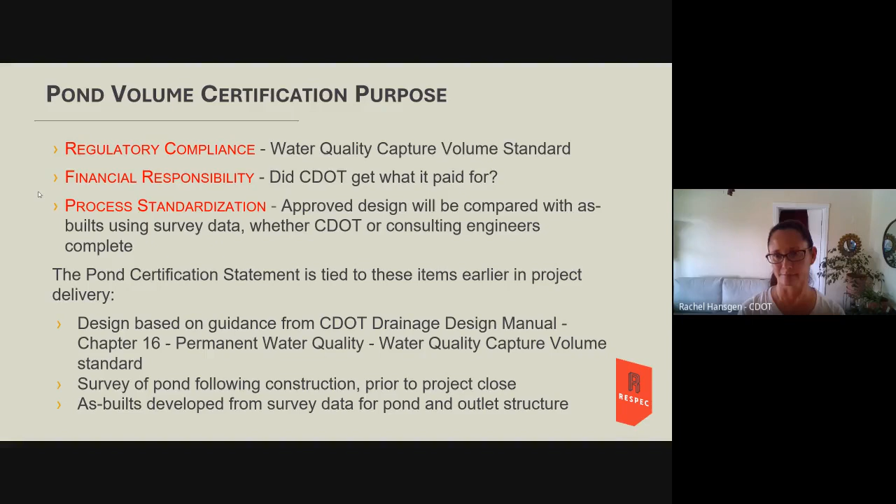Are there any questions about the 30,000 foot level of the pond certification statement? Okay, Jesse, all right.

So as promised, what data is required before you start digging in? Frankly, if you get all this data straight off, you can be done with this in 45 minutes pretty easily. But as I've found in doing these so far, you don't always get what you need. The first thing you need is the construction plans, and the water quality report.

The construction plans may or may not contain all the information you need. Sometimes the construction plans show WQCV equals, defining the water quality capture volume. The contractor doesn't need to know what that is, but sometimes the plans say that, so that makes your job easier.

If the construction plans don't have that, then you'd look to the water quality report, which may be a subset of the drainage report or maybe a standalone document. What you really need is, what is the water quality capture volume? That'll be an acre footage typically. And then at what elevation is that supposed to occur? That'll be an elevation.

The water quality report will typically contain UD detention spreadsheets. There are other ways to go about calculating at what elevation the water quality capture volume occurs, but UD detention.xls has made it simple for everybody, so a lot of people use that.

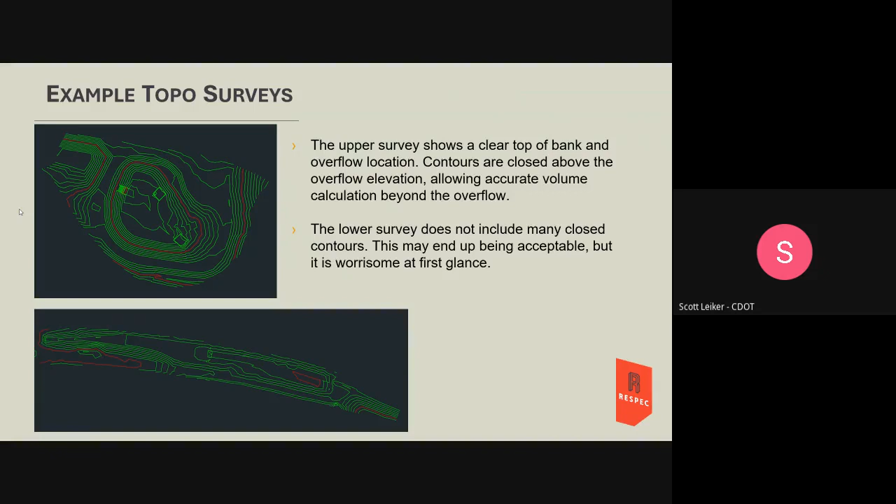Jesse, Scott has a question before you move on. Yeah, go ahead, Scott. Like the previous screen and this screen, typically we get that information from the project manager or the water quality specialist, who is forwarding this information to either the consultant or the engineer. Who are we dealing with? Who are we working with? It should be the project manager. Yes, Scott, that's who I've been getting it from so far. Right, I think, yep. Anything else before I move on?

Great. So that was what you needed for the geometric analysis of the grading, right? The pond volume. This is what is needed to make sure water can leave the pond the way it was intended to leave the pond.

An as-built markup of the outlet structure. The outlet structure as built should be a separate viewport in CAD, or it could be a redlined construction plan in PDF. And the data that you get has to answer, how does water leave the pond?

So that might be orifices in the orifice plate. How big are they and at what elevation? The overflow weir into the outlet structure - that might be a type C inlet with a top of grate elevation. It might be some other type of structure. And then there may be an overflow weir, like a 100-year overflow weir.

The important thing is, if there are no PDF markups, if you don't get a markup of the orifice plate that shows different elevations from those in the design drawings, in the construction plans, they weren't surveyed. Because I could survey the invert of an orifice 5 times and I would get 5 different values to the 0.01. So it's a near statistical impossibility that if they say, oh, this is as-built, they didn't survey it.

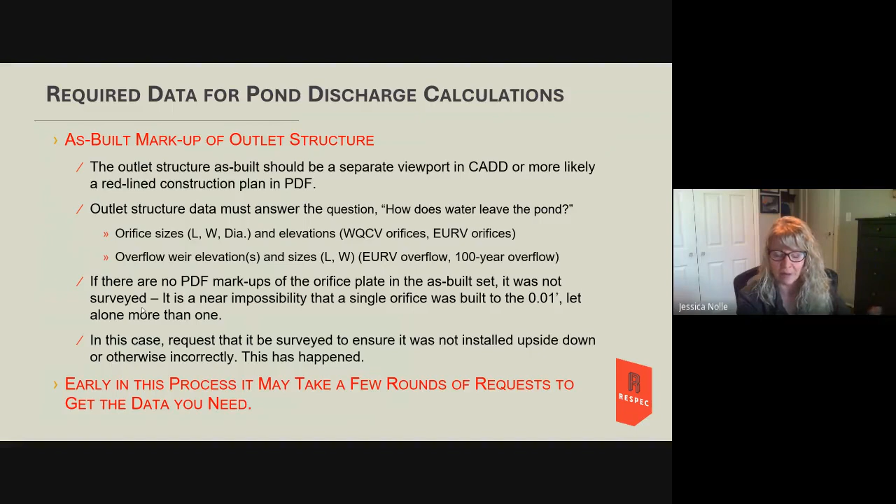And as CDOT moves through this process, and they have their contractors and consultants participate in this process, it may take a few rounds of requests to get the data that you want. But I'm hopeful that after enough times of asking for it, the surveyor will get what you need.

This is an example of an outlet structure survey that I got after I said - actually, this outlet structure, the first time I got the survey, I didn't get these orifices or the inverts. I got the bolt holes. So the surveyor went out and did a really detailed job of surveying bolt holes. And I had to send him back out to get the actual holes that the water could go through. So this is the level of detail that we're looking for.

Does anybody have any questions? And then this top of concrete, 5560, that then was the water quality capture volume overflow. Does anybody have any questions on this so far?

Hey Jesse, I was just going to say, so the as-built survey is typically a plan sheet that has been marked up with red lines. Right? And if that sheet comes back and there's nothing marked up, yes, they probably didn't do an as-built survey. So this next slide is an example of what I received on another project, and it says as-built in the upper right-hand corner, but there's nothing marked up. So this was a pretty good indication that it wasn't surveyed.

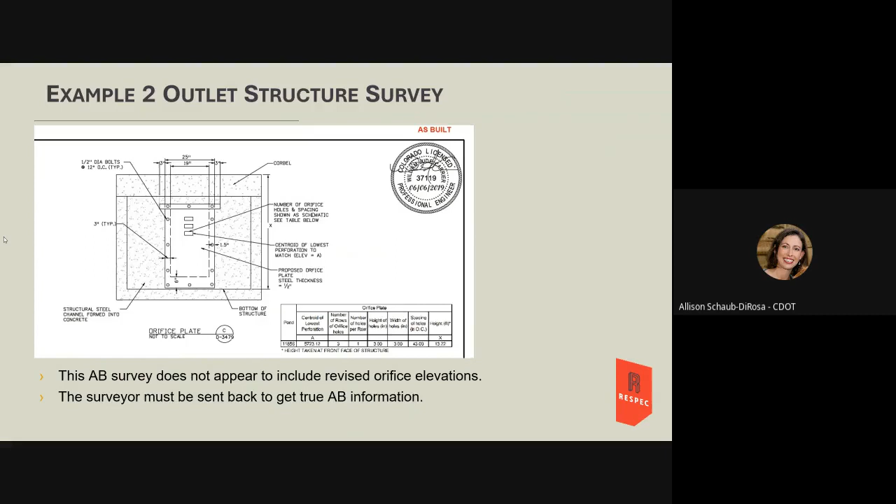Jesse, I had a question on the last example on the last slide - this one? Yeah. So is there just one elevation given there, the centroid of the lowest perforation, and that's it? And then so then just assuming the spacing? So it has the spacing here.

So it says the A is the centroid of the lowest perforation, which would be the centroid of the lowest perforation, match elevation A, and the number of rows 3. Now this is a great example of what I just love, is when people don't bother to draw things to scale.

Clearly the spacing of the holes is not... well, maybe it is if this whole thing is 13 feet high, but then it's not drawn to scale horizontally. Well, it says not to scale, but like, oh come on. Yeah, when that's so badly to scale.

I know, right? But you go with the numbers, and when you get this, you should be able to go see in the drainage report that this was the design. But then when you get the as-built survey, you would add 42 inches to this, and then you would add another 42 inches to that, and that would give you where these are supposed to be.

Yeah, okay, so thinking like a contractor - what is this actually supposed to be, and forgetting that it's horribly out of proportion. That's what I wanted to say. It's fine if a drawing's not to scale, but I feel like it should be proportional. But there's no rule for that, so you just have to go with the numbers that are there.

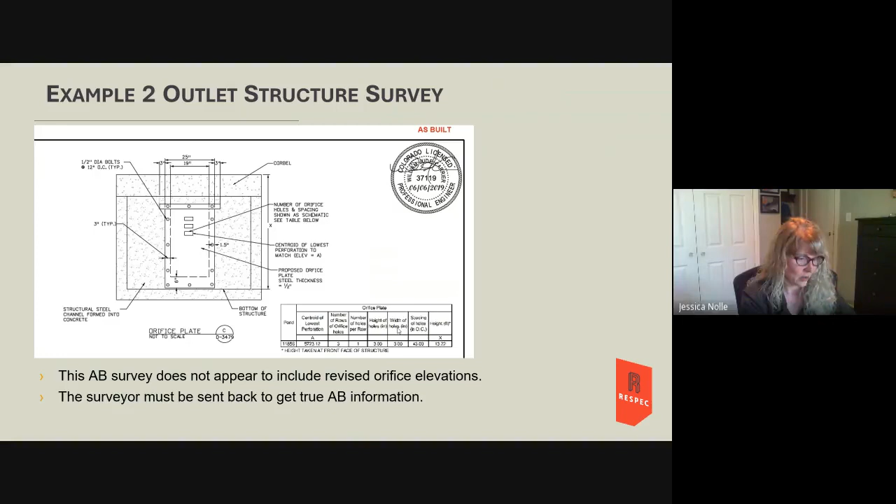Okay, so we will talk more about going through the examples, going through what was received. But I'm going to move on now to the general pond volume calculation, and some different options for that.

In your CDOT drainage design manual, section 12.7.2 indicates 3 ways to calculate volume. Average end area is something everybody knows. You would take the average of the elevation, or the average of the area enclosed by contour 1 and the area enclosed by contour 2, and you would average over the difference in elevation between those.

This is not the most common way to do it, but it's allowed by your drainage design manual. The frustrum of a pyramid equation is the one that is more commonly used, and again, you can look these up in your drainage design manual.

The final way that 12.7.2 says you can calculate is the prismoidal formula, but it's for perfectly trapezoidal basins, so we're not really going to get into that.

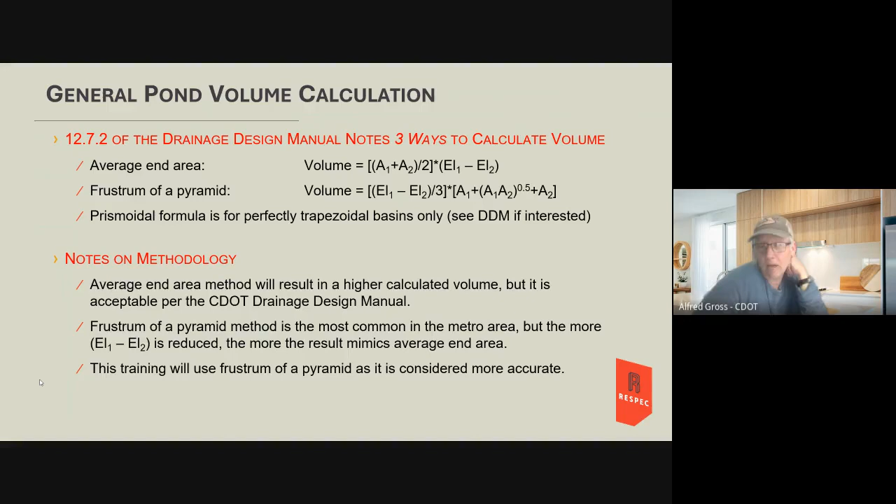Hey Jesse, real quick - so when you're doing that with those different elevations, those correspond to your contours, right? Those correspond to the contours, yeah. And then the contours are only 1 foot. I don't see... I know the example you're talking about where they went to 1/100 of a foot.

The way contours are developed is that surveyors go out there, put their survey rod down, take a measurement, walk, take another one, and walk again. The tighter the grid the surveyor uses, the more accurate model you get. If they take a shot every 5 feet, you'll get a more accurate model than if they take a shot every 20 feet, and you won't know the difference.

I'm guessing your survey manual has frequencies for this. Frankly, if you have a fairly uniform side slope, you're not going to get a whole lot more accurate taking a shot every 5 feet than every 10 or 15. Surveyors are trained to take a shot where the grade changes, or on a grid. The accuracy of the contours that come out of that survey depends on how tight the grid was.

But I feel like for us to question that, you get a survey from a PLS, you've got to just go with what's given. That's why we ask them to produce the contours. They're saying that this is a fair representation, so we're just going to go with that.

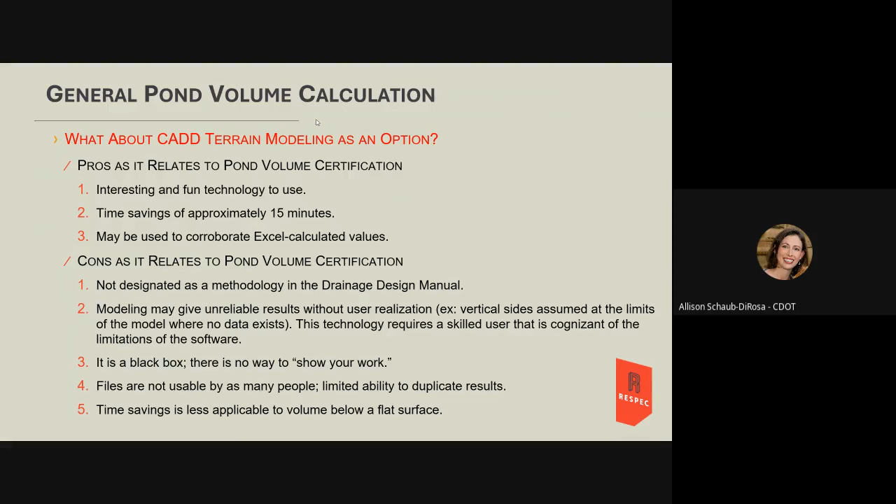The water is like the surface—when we say pond volume, we mean the water quality capture volume occurs when water builds up to a certain elevation, and the water is going to be flat at that elevation. So what is the volume below elevation 5562.46? That's easier to do by hand using existing contours than it would be if you had an irregular surface and you're digging.

I gotcha, yeah, I gotcha. That's a much easier calculation to do by hand. I may have missed a little bit of what you're saying, but I think this goes back to the general applicability of using that—what did they do for the design, and if we're going to be using something different.

The differences aren't substantial, Stuart. The differences are pretty minimal, actually. Because I've done these backwards, forwards, and sideways, different ways, my volumes change by 1 or 2%. So it's not that what you're saying is bad—it's a black box, there's no way to show your work. But that's the bottom line of it.

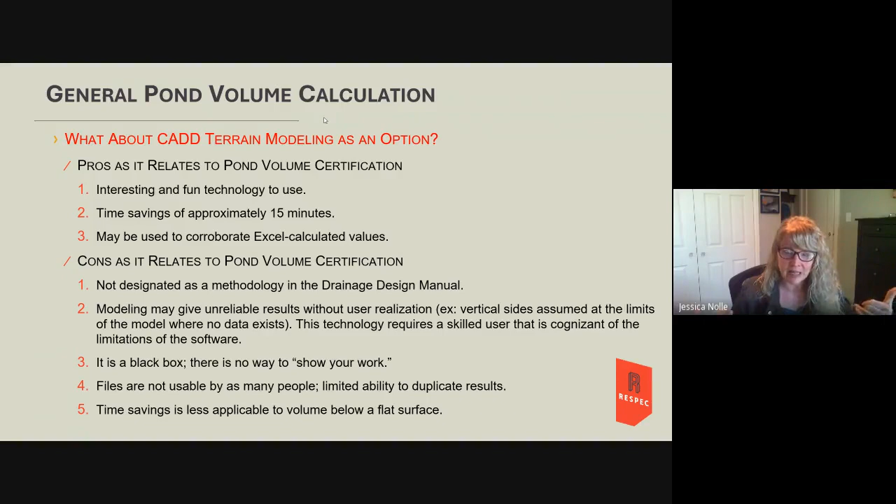Okay, yep, I stand by it. No, I just think it's more defensible—like you can say, look, here is all the data, and anybody can follow it. Sure, yeah, no, I get it, but we're talking about coming in after the fact, comparing—just back to comparing apples to apples is my point. Yeah, okay.

So what we're ultimately looking for, with a few caveats and exceptions I'll get into later, is the calculated pond volume at the design water quality capture volume elevation must match the construction plans and the design report within reason—substantial conformance, or substantial compliance. So we can have reasonable percentages, right? Is it within 5%, 8%? That's something we could all look at, and I'll get to what will help us determine that later on this slide.

For one of the ponds I looked at for CDOT, somebody said, hey look, we're allowed—and here it is in quotes—we're allowed variation from the plan elevations of 1 inch. So I actually went in, and for all the contours that were surveyed, I dropped their elevation by 1 inch in an effort to say, did we get what we paid for? And it helped like this much.

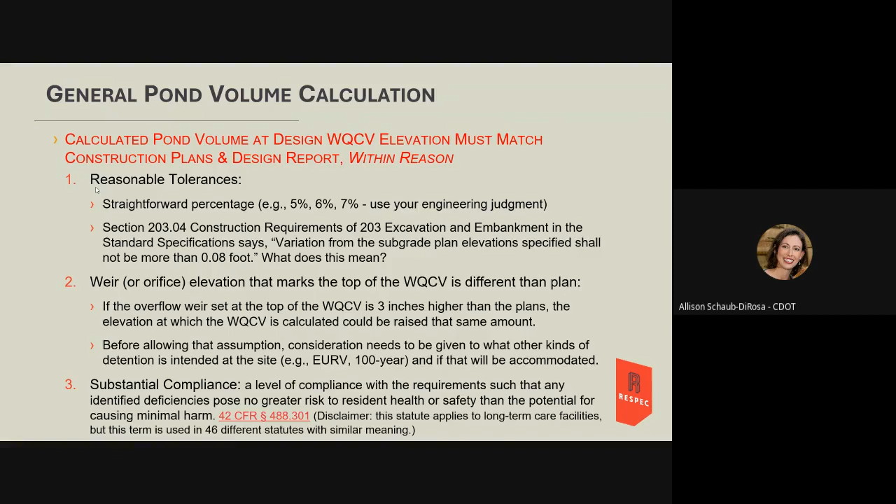There will be questions, and you can try me first. But I think the big question here that Jesse's pointing out is there will be a tolerance here. It won't be exact, right?

It all potentially seems very difficult, but if you have all the information you need, it's really straightforward, especially if they did a good job. I've spent a significant amount of time trying to get to yes, checking things like where the outlets were. Probably 75% of the ponds I've looked at met requirements right off the bat. I think only 2 out of 8 didn't meet the volume requirement right off the bat.

I think as CDOT proceeds through this, it'll become apparent to the contractor: if you're going to miss, you need to miss high. Don't be short on this.

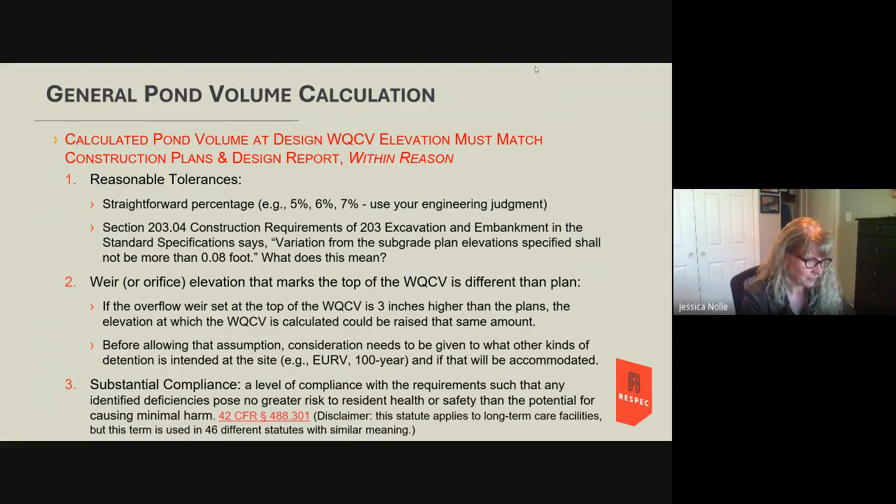Here was another consideration, and this goes back to what if you're not getting everything you need. Sometimes the design documents may have to be reviewed to understand the intent of the construction plans. Sometimes the water quality capture volume or its associated elevation may not be in the plans. I said that at the beginning. What if the reviewer notes that the design documents, the UD detention or water quality report, do not match the construction plans?

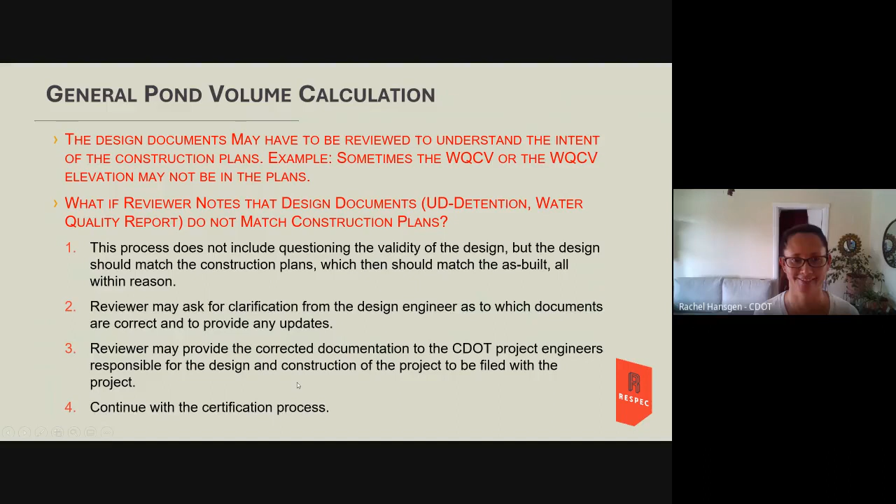Rachel? Hey Rachel, you're on mute, go ahead. Can I stop this and start it? I don't know, I've never done that before. I think it'll make 2 different recordings, but you can try it, and we can stitch them together if needed. I'll hold on to it. It's only probably 6 or 7 minutes. I'll let it run. Okay sounds good, we'll have a nice little pause there.

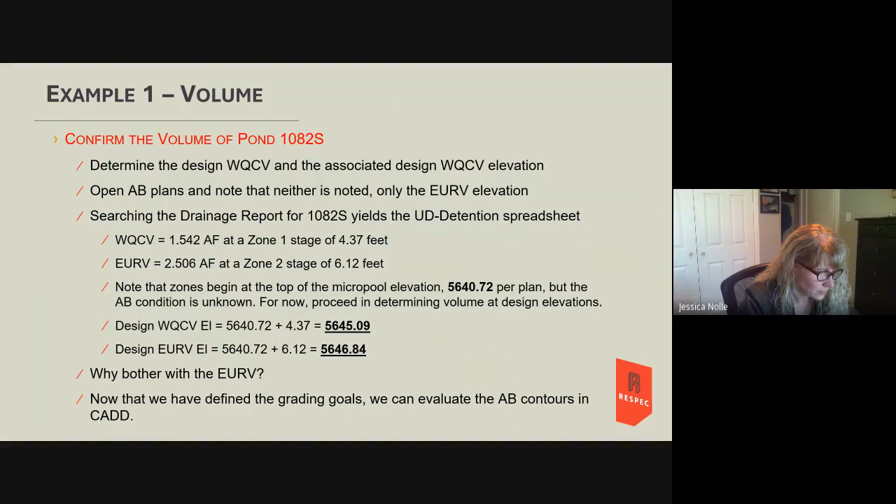Amy, are you ready with 1082 South? Yes, I am. Okay, I'm going to run to powder my nose.

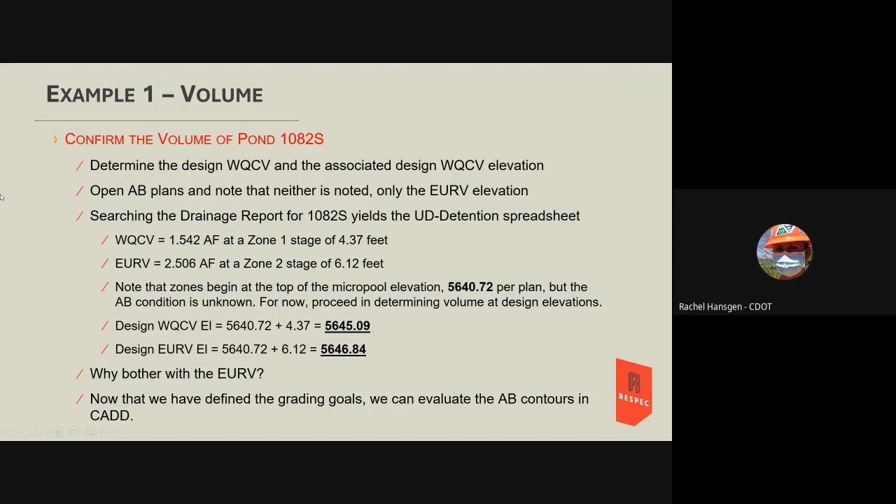All right, I'm here. So we're going to look at one of the ponds that I reviewed for CDOT. As I stated at the beginning, the first thing you need to know to figure out if it was built to plan is figuring out what the plan is.

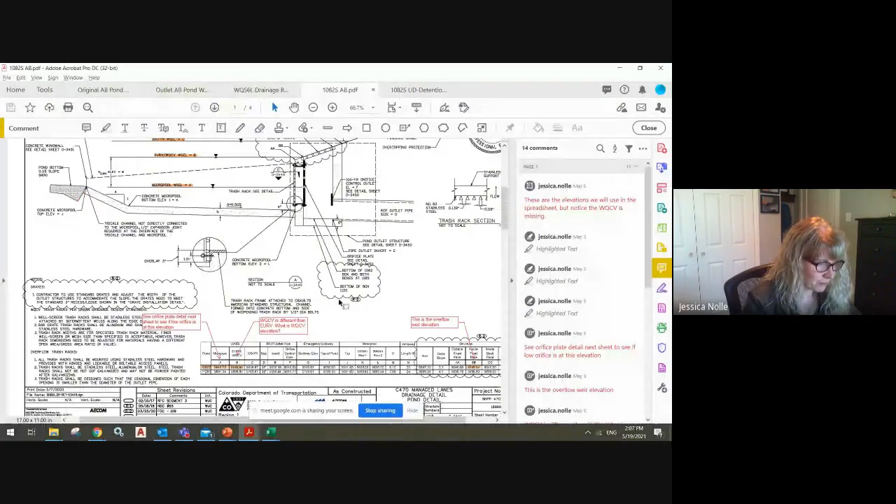So this is the as-built plan I received. Because there's more than one pond involved, you can see they've got it in a table, which is typically a nice way to do it. And we zoom in here. Hope nobody gets seasick easily.

We zoom in and see elevation B is the EURV / water quality capture volume. Well, this says HEURV. As I said before, EURV is not always included, and the water quality capture volume is typically less than that.

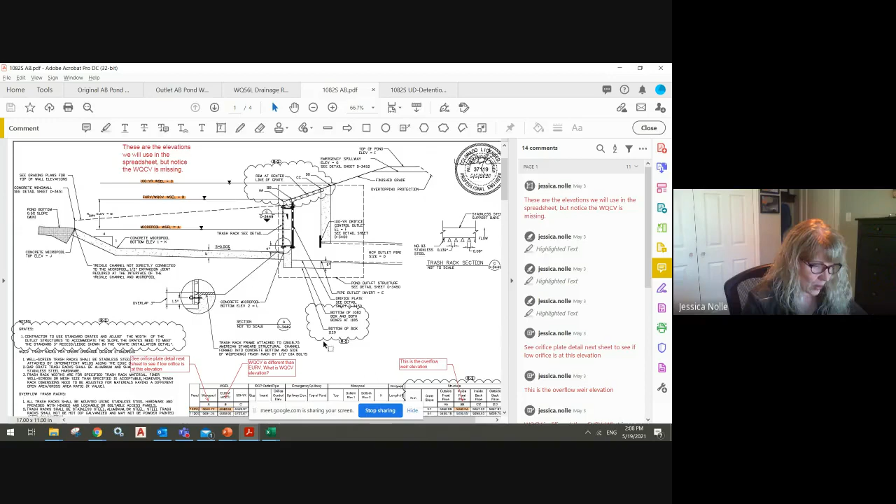So looking at this table, there's the overflow, showing that at this elevation it's going to start spilling over into the outlet structure. So the water quality capture volume is not actually in here, and the water quality capture volume elevation is not in here either.

We can look at the orifice plate detail on the next sheet to see if the low orifice is at this design elevation, just to confirm it. 40.72 is the top of the micro pool, and that's typically where you put your first orifice.

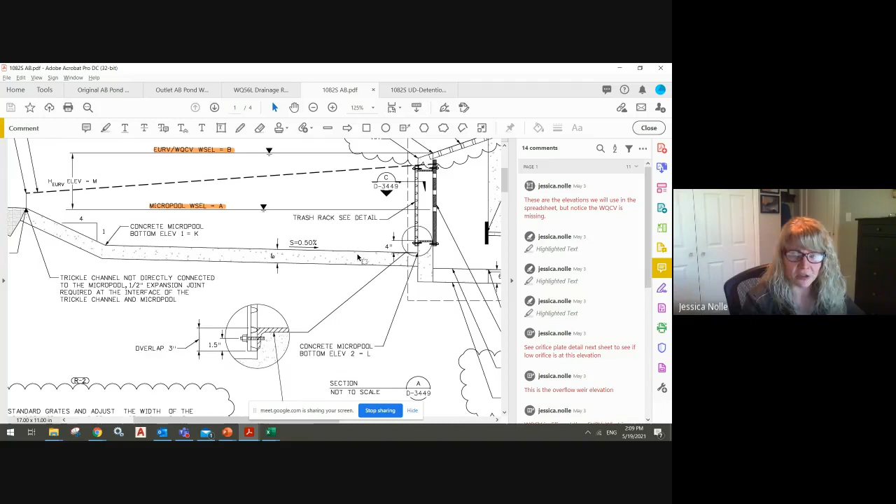As a sidebar, going through the Mile High Flood District's Volume 3 on how to design an outlet structure will be really informative if that hasn't been part of your practice as an engineer, letting you know what's typically done and how to review plans. Everyone does different things in their careers, but Volume 3 is really good. They have a whole section on outlet structures and water quality capture volume, extended detention basins. That's a good thing to review.

All right, so now we're going to go to the drainage report to see if it's in there. This is what I was referring to before, sometimes not all the information you need is on the plans. So this is 5 pages of the drainage report I excerpted for this presentation. There were probably 150 pages I had to dig through to find it, but the good news is it's searchable in PDF, so you can type in the word detention basin and get to this.

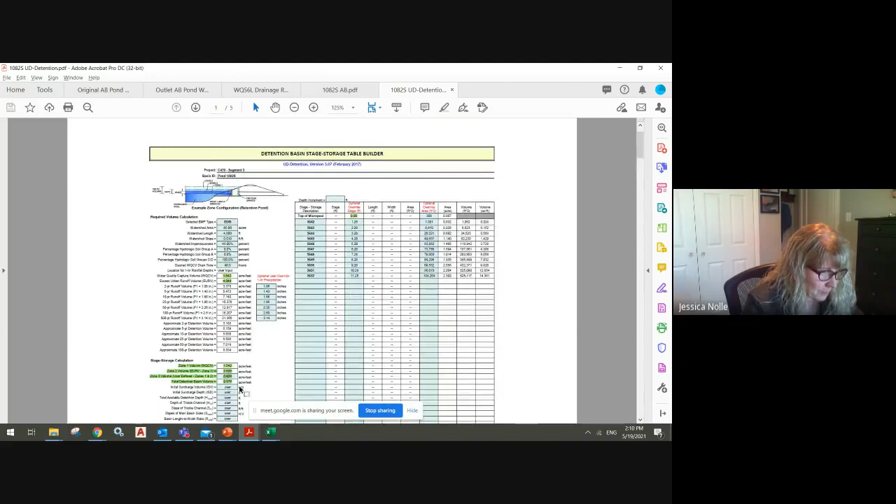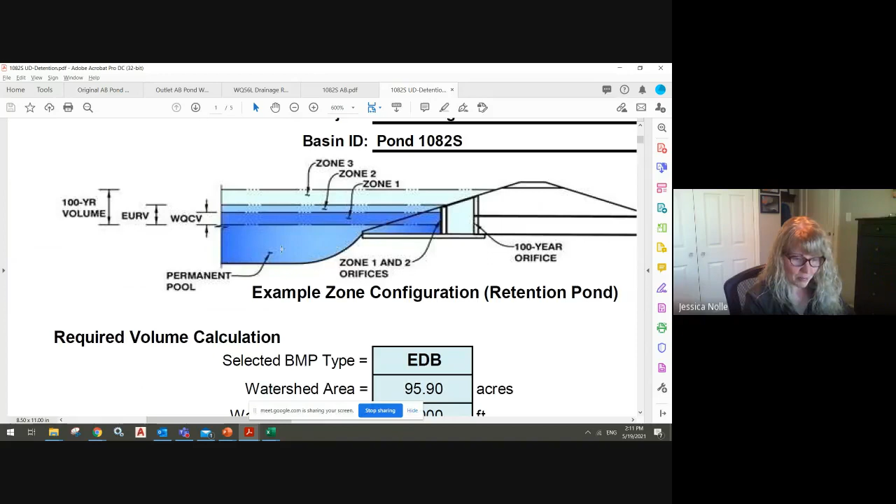So here are some values that we have. It says the water quality capture volume is 1.542 acre feet, and the EURV is 4.048 acre feet. Zone 1, if we go up to this schematic, you can see water quality capture volume. This is almost exactly what the outlet structure looks like, right? Here's the EURV, it's where the overtopping occurs. The water quality capture volume is zone 1. Here's your permanent pool, your micro pool that we talked about.

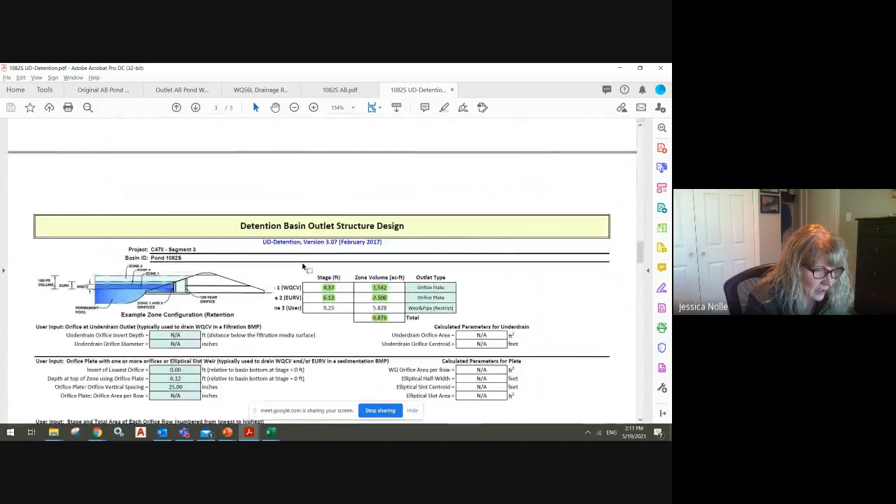So looking at this, zone 1 is 1.542, that matches here. The elevation at which zone 1 occurs is... this says, I don't know why this is hidden, but it says zone 1, water quality capture volume. Here's that 1.542 acre feet again, and a stage of 4.37. So that is above the lowest orifice centroid elevation.

So we have the 1.542 acre feet at a zone 1 stage of 4.37. The EURV, I won't show, it's in there if you guys want to go through this. That's 2.506, at a stage of 6.12.

So again, the zones begin at the top of the micro pool. That's the permanent pool elevation of 40.72 that was in the plans. The as-built condition is unknown, but what was the design? The design water quality capture volume is at the centroid of the lowest orifice, or the top of the micropool, this is the permanent pool, 40.72 plus the zone 1 stage of 4.37. So we end up with a design water quality capture volume elevation of 45.09 and a design EURV elevation of

46.84. Why bother with the EURV? I think I mentioned that a little bit before, that maybe if your water quality capture volume is a little short, maybe they make up for it before the water starts spilling out. That might be why you would want to consider the EURV.

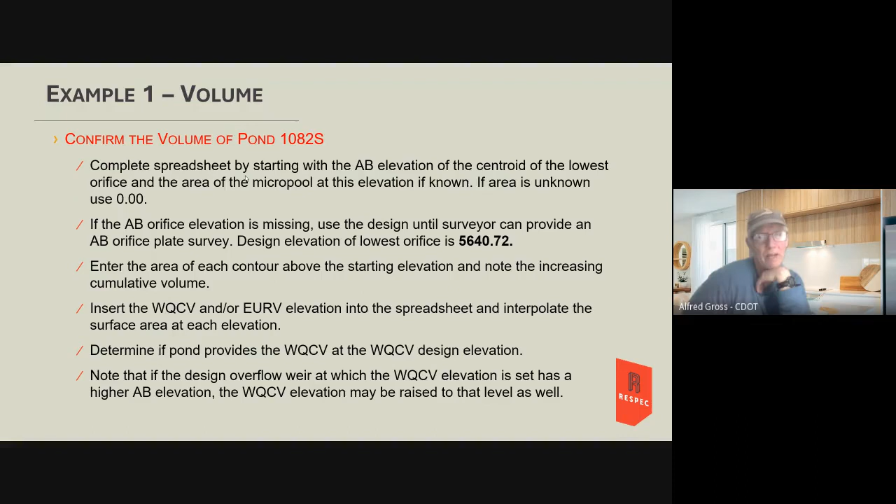Yeah, 1082 is along 470. That's what I thought. So the reason it wasn't on here is because your other ponds along C470 that don't have EURV do have the water quality capture volume. Oh okay, so this sheet just, the table was not set up for, all they had to do was add another column. Right, and say EURV not applicable on the other ponds. Yep, but whatever, I mean that's fine, it was nice. It all matched up.

All right, so now we have our goals, right? We have a water quality capture elevation of 45.09 and a volume of 1.542.

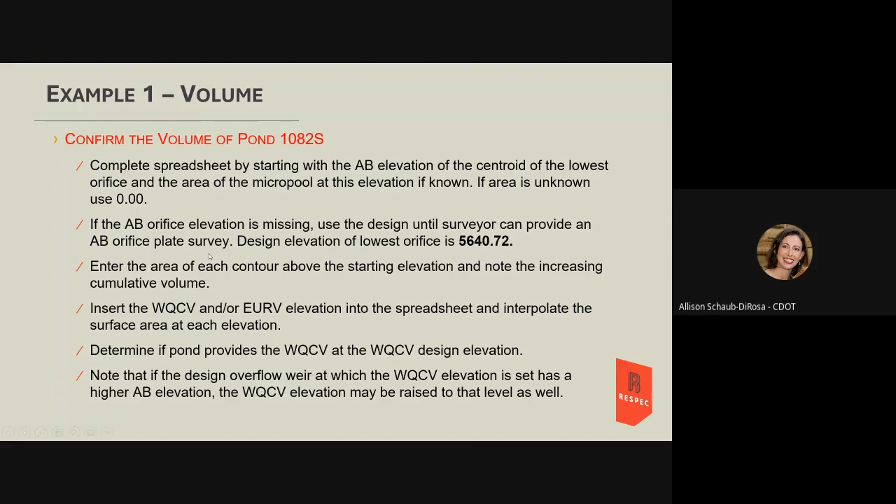So I have a question: what if it doesn't match up? I know we're not checking the design, but what do we do? Well, that's when I mentioned earlier that maybe they didn't put the most updated UD detention spreadsheet in, or they didn't update the text of their report. What if they just screw it up? Well, that's when you call the person who sent you these files and say, hey, these don't match. That should be the project manager for the design portion of the project. Then they will get back with the consultant that did the design and say, why don't the design plans match your drainage report?

And then you just go from there. But to hold them accountable for it, it's fine—if it doesn't match, it doesn't match. Now if it's off by like 200ths, forget about it. But typically that's the point where I'd say, why doesn't this match? I actually had one where the naming of the pond was confusing—I was like, which pond am I looking at? And they said, oh we're so sorry, that was from a previous submittal. Here's the right spreadsheet, here's the right PDF. And we went from there.

So if it doesn't match, most of the time it's going to match. If it doesn't match, that's when you raise your hand and say this doesn't match—give me the right information, give me information that matches.

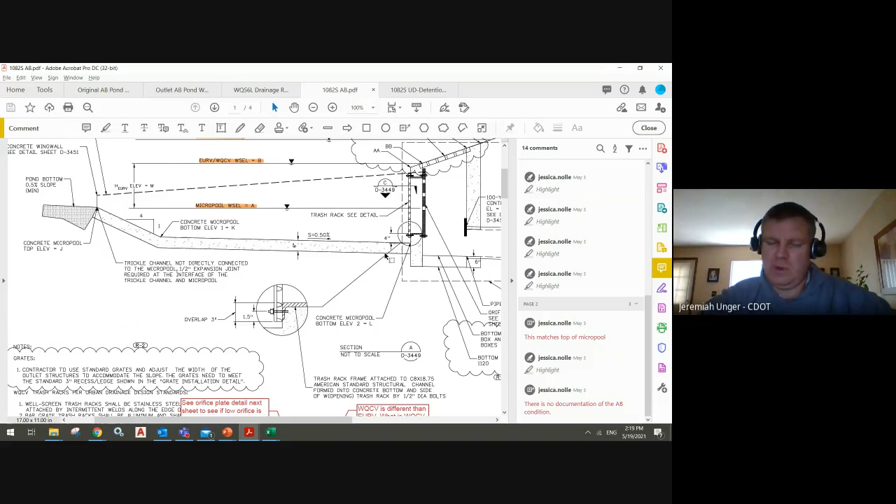I think that wherever the centroid of the lowest orifice is, that's where you need to start because that's how water gets out. So looking at this plan in front of us, Jesse, is it safe to assume that the initial surcharge volume wasn't built into the volume of the micropool?

Let's see, maybe elevation J is above elevation A. Oh, look at that, Jeremiah. Elevation J is what, 9 inches above elevation A? So it doesn't show it, but this is again a lovely example of drawing one drawing and then using different variables. It looks like this elevation is much higher than this.

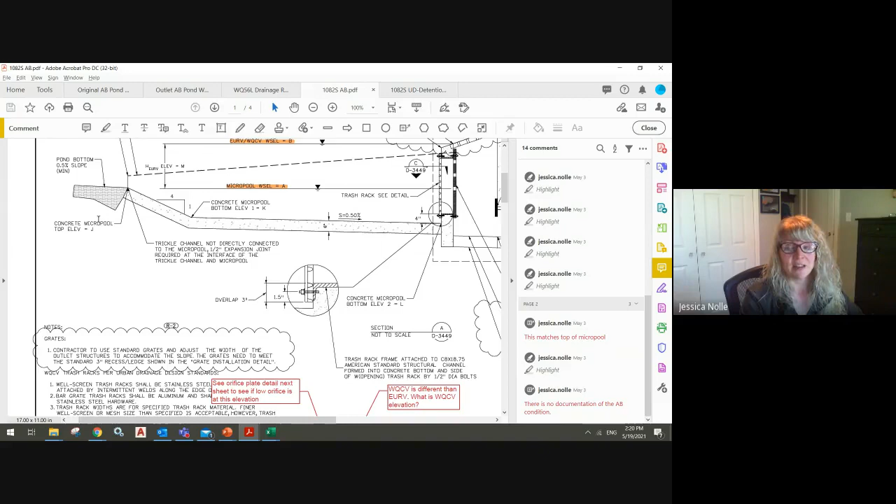Okay, but that, Jeremiah, would not be something for this aspect of the project. It would be for the design engineer to catch, right? Right, and I guess I was just asking the like...

Going from that water surface elevation for the top of the micropool, I think the surcharge does go above the lowest orifice, right? It should, yeah. And in this case, it appears to, because this elevation J is about 9 inches higher, maybe. Yeah, it's about 9 inches higher. Okay, thank you for going through that. Thank you, yeah sure.

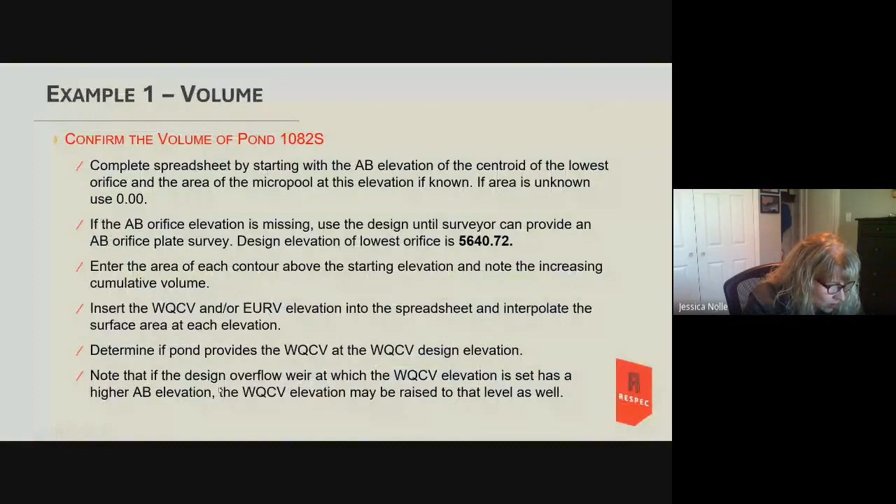So Amy, is this where I have you do? Yes, it is. Amy's just going to give a quick tutorial on... so what this spreadsheet is, I'm going to explain the spreadsheet.

I'm going to stop sharing, Amy, and you can share your screen now. Amy's going to do a little tutorial. This may be redundant for many of you, but she also included a written tutorial in the documentation associated with the class, so she's going to kind of walk through it.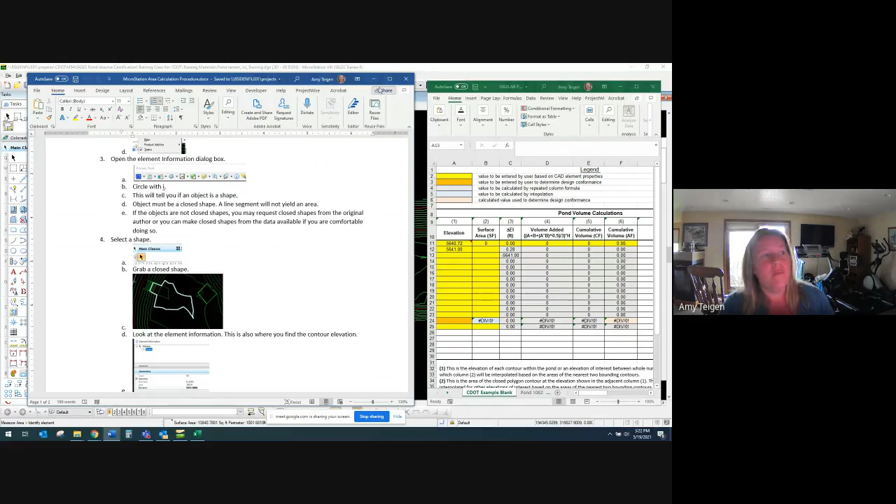So to get the area, you open the measure area command, and then you want to change this method to element. And then when you select the element, it tells you right here the area in square feet, and it also tells you down here the area in square feet. And then that is the area that you are entering in right here.

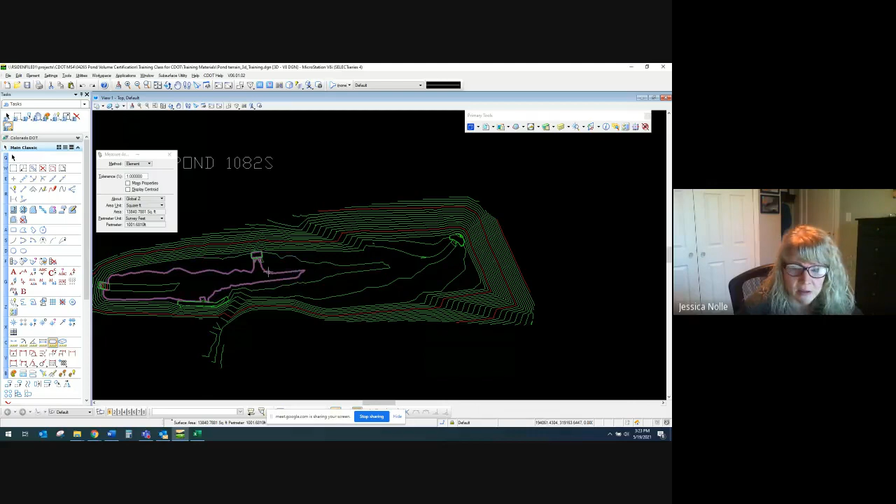So that is telling you that it's contour 41. And if you don't know, you can get that information from here. From the... is it 41, Amy? I think it's another, I think it's 43. Oh yeah, 41 is over here. And then that's where you get the areas right here to put in.

Where does it show the elevation of the item you clicked on? So that's in a different command. You have to go to the select button, and then you have to click it right here. So this one is telling you that this one I just selected is 5642 elevation, and this is in the information, the element information button. And then going to the area one only tells you the area, it does not tell you the elevation.

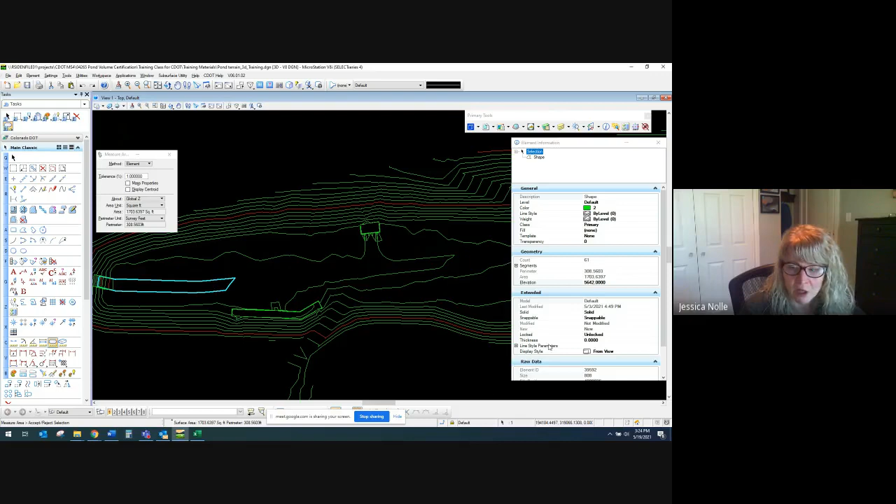So at elevation 42, we're looking at both screens. At elevation 5642, we have an area of about 1704. That's where you would put in 1704 right here. Once you already have this going, you can just click on the next one, and it should keep taking you through. Yeah, 162 — you take 162 in here, then fill it out all the way to the bottom, and you get your areas for this column. This is just for the yellow, and we'll talk about the orange and the blue in a second.

Dennis, go ahead. I noticed earlier in the conversation we were championing the frustum method of calculating volume and the average end area, but now we're doing average plan view volume. No, that's the calculation — the frustum of the pyramid equation is what's in column D, and you use the areas. The input to that equation is the areas at each elevation.

Everything in gray is calculating automatically. If you look at cell D10, the letters A and B are the variables in column B, rows 12 and 13. So when you move from 12 to 13, the cumulative volume, or the volume added between elevation 41 and 42, is 798 cubic feet. The H value is in column C, and that's the difference in elevation between rows 12 and 13, or elevations 41 and 42.

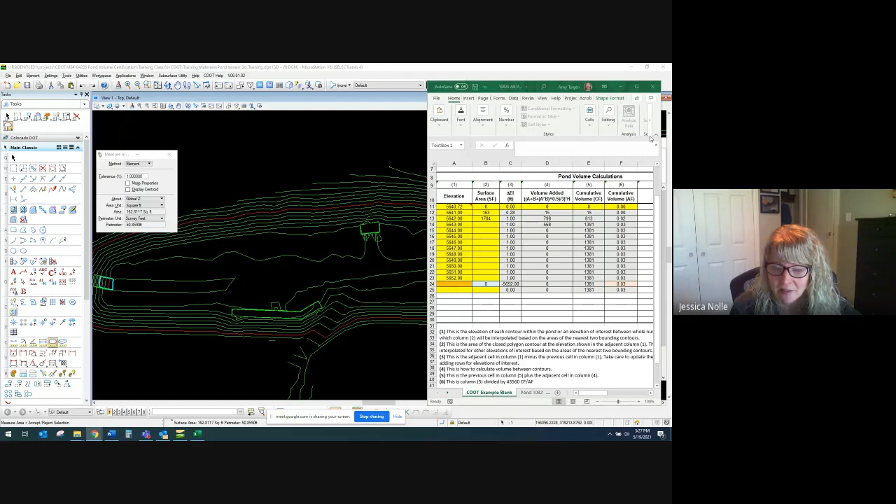The first column is the elevation of the contour. The second column is the surface area bounded by that contour. The third column is the difference in elevation between that contour and the previous one. The next column is the volume between those two contours. And the fifth column, column E or column 5, is the cumulative volume.

This spreadsheet is in the materials as well, and you can look through the formulas. You'll see that the formulas we have in there match cell D10, which is just a text string, and it's what matches your drainage design manual.

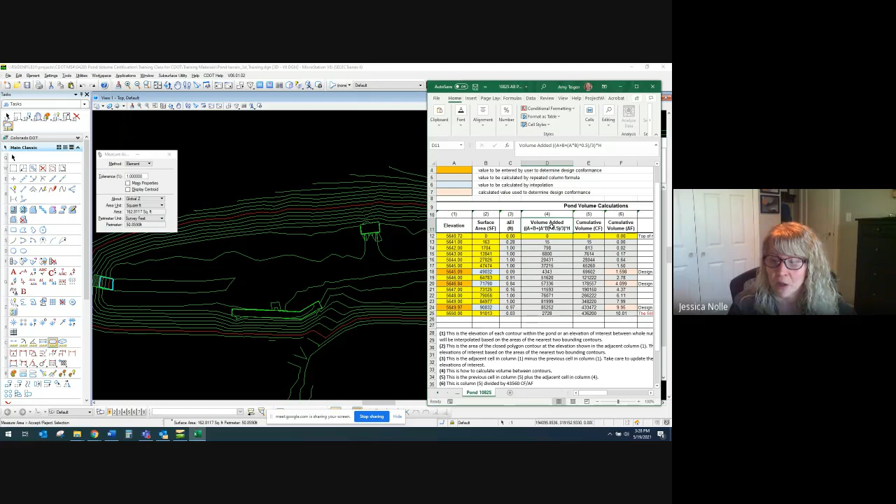Does anybody have any other questions on this, or questions for Amy about MicroStation? I'm going to talk about the different colored cells — there's also a legend at the top of that spreadsheet that explains what the different colors mean, but I'll go over that in a second.

Does everybody know how to use MicroStation to do that? Or maybe I should say, does anybody not know how to use MicroStation? I can't use MicroStation at all. But Stuart, I bet you have staff that do. Well, that was your question you asked. I know, I got to be honest, I haven't been in MicroStation in probably 15 or 16 years. Do you get in CAD at all? No, not at all. You guys are like me — our pay grades are too high for this stuff anymore. Well, back 20 years ago I was a really good CAD jockey. Me too. We got dragged kicking and screaming into MicroStation. I took a week-long class and nothing — I knew Geopak 20 years ago. Yeah, I've heard of Geopak. That was it. They took AutoCAD away, and I'm out. I actually started using MicroStation and Geopak.

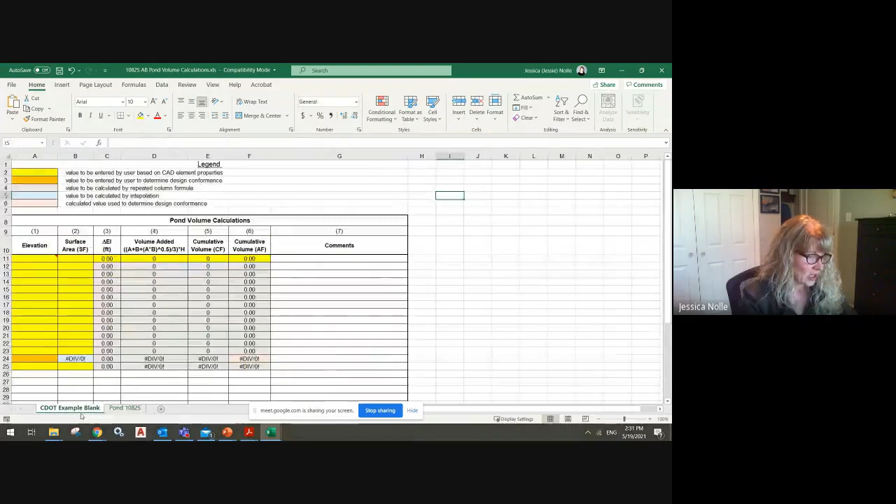So we did these contours. I'm just going to talk about how this spreadsheet was created. We entered in all the contour elevations here straight away, and then we inserted rows here, here, and here to reflect the various design elevations.

You'll notice these yellow cells. If you look up at the formula bar, these are all just values that were inserted, the yellows, but the blue is a interpolation between 45 and 46 to get the volume that occurs at 45.09. So what would the approximate area be at 45.09? That's a direct interpolation, and that's okay.

But we end up with a cumulative volume of 1.598, and if you recall, our design was 1.542. So we're there, we did it, they did it, it's all good, provided we get the outlet as-built structure, but we'll go there in a minute.

I also went ahead and put in the EURV elevation just for fun, and we got a cumulative volume there of 4.099, which beat our EURV design volume.

Now Al, in a previous training, said, but what if we end up with way too much volume stored beneath the overflow weir? Like, won't we be running potentially into water rights issues? And I would answer to that, you would have to be way over to impact.

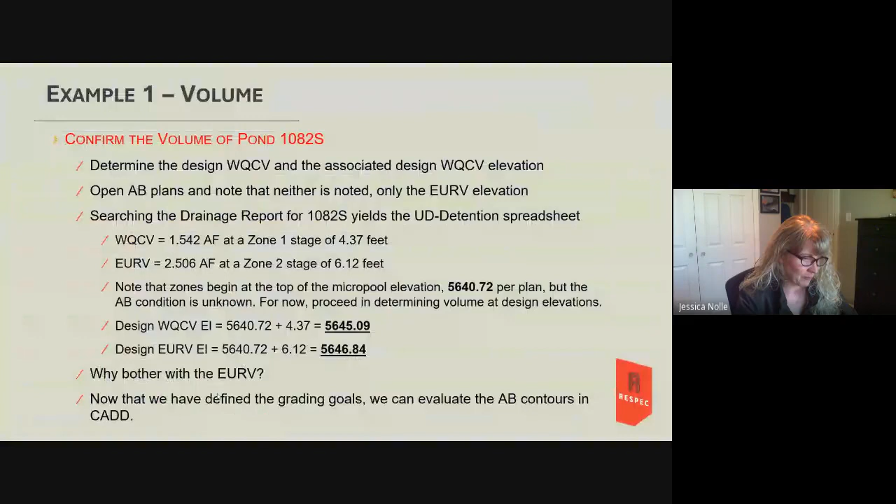Note that if the design overflow weir, at which the water quality capture volume is set, has a higher as-built elevation, the water quality capture elevation may be raised to that level as well. I spoke a little bit about that previously. That's not the case with this—we actually don't know where the as-built volume is because I don't have that. That's something I think we're going to look at in the next example.

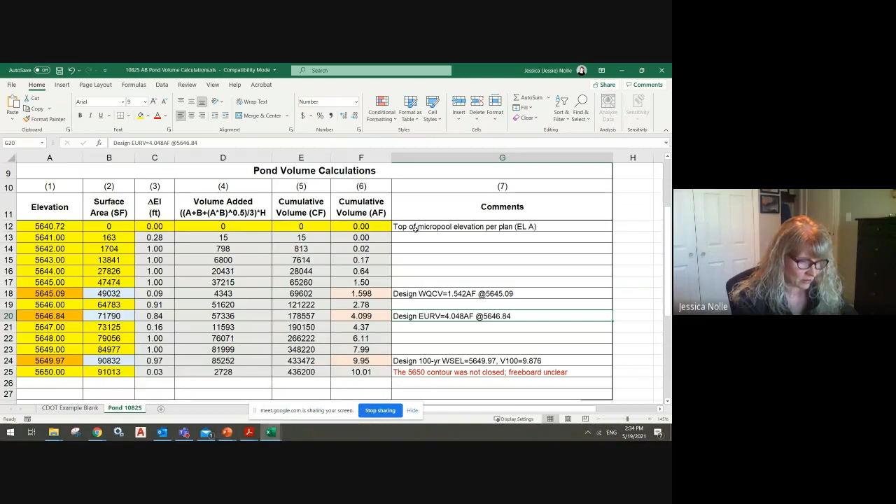Does anybody have any questions about what's going on here at this point? That's awesome, okay.

This is basically just what Amy went through, this slide. So I'm going to move on to the next one. This is another—hey Jesse.

Oh, sorry, yeah, sorry, real quick—so you would certify this pond? Oh, for sure. Okay, well, actually I would request that they send me a real as-built of the structure and not this.

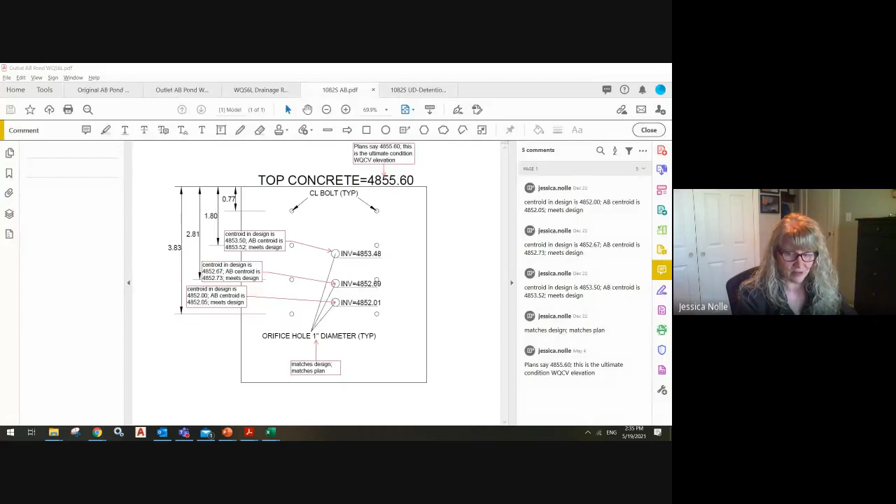So that red is not theirs. That's you? That's me. Okay. Yeah, they had no markups on this. They had no markups on this. Well, actually, what are the little bubbles? Well, the bubbles aren't...

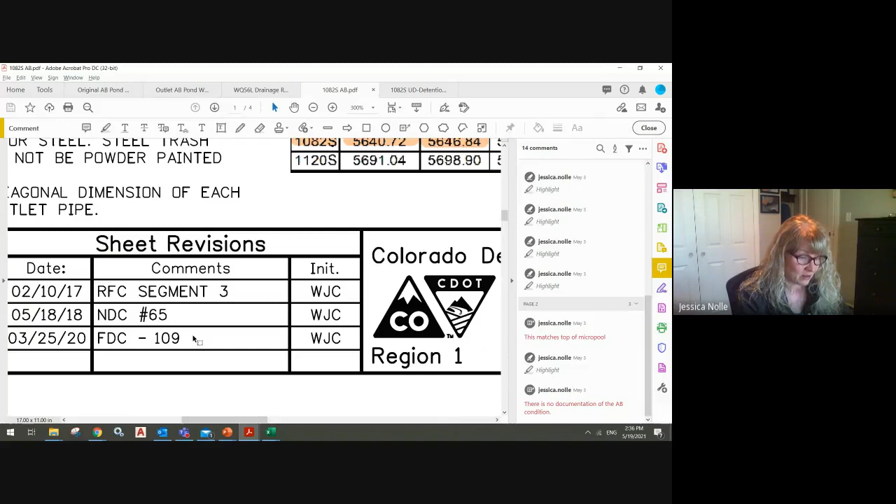Well, so this is R2, which I don't know what that means. This doesn't say—this is probably somebody's initials, but it doesn't say AB. So this is the one where I would ask them, like, or go to the original design. First of all, they didn't modify these. There's no bubble around this.

Okay, and you know, this overflow weir elevation, that's great, 46.84. But yeah, I would ask to get a survey that looks like this—top of concrete, where are the holes, how big are they?

Okay, yeah, all right, I'm going to get rid of that and move on to the next example, which is pond WQ56L, 3056L. This was the one where I said the ponds were named differently, and I couldn't tell what was going on, so I had to ask about it.

But again, the first thing you do is determine what is the design water quality capture volume and the elevation at which it's supposed to occur. So are you guys seeing these as-builts?

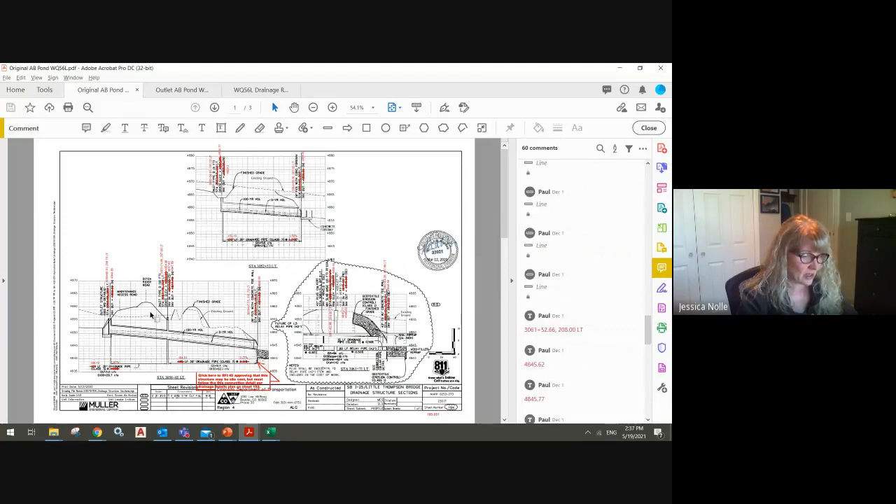Okay, so this has nothing to do with the pond, but I wanted to show you, like, they know what an as-built is—you mark it out and you put a new elevation. So if that's on one sheet but not on the other sheets, then they just didn't do it.

This one, though, if we zoom in a little—oh my gosh, look at that. Water quality capture volume, 0.137. Water quality water surface elevation, 53.73. Done, that's great.

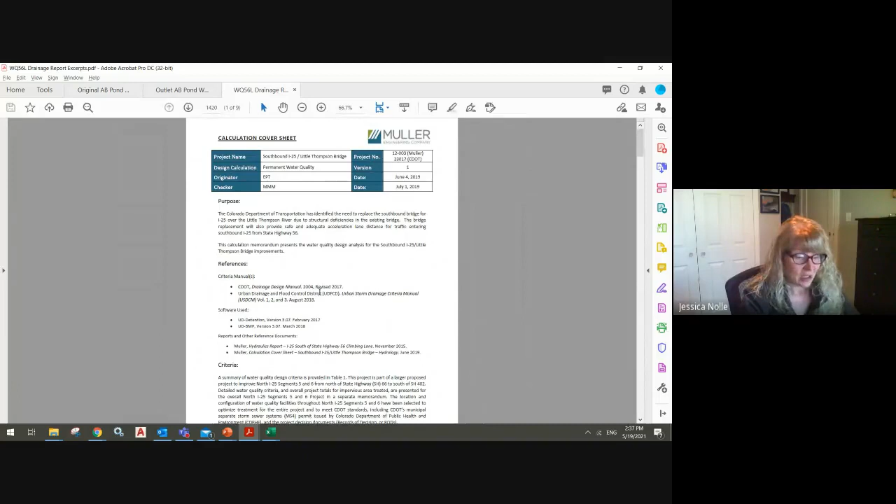Now, I did go ahead and look through the report just to confirm that. Technically that's not something you would have to do. There it says the drain time is 40 hours. That matches the water quality plan sheet—it says 40 hours right here.

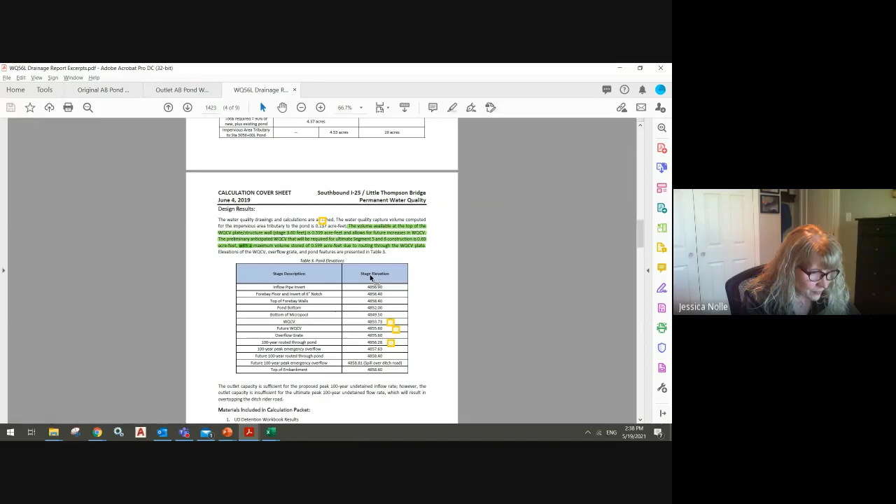Just went through, and this is what was confusing, I think. 53.73 is... oh, this is the one that got confusing because I was reading this. The water quality capture volume computed for the impervious tributary area is 0.137, and that matches here.

And then it says the volume available at the top of the structure is 0.599. And I was like, well, why? What's going on there? It says it allows for future increases in water quality capture volume. So that told me that this pond was built not only to provide water quality treatment required for the current construction project, but it was also built to treat water quality from runoff from future construction, which is a great thing to do.

But that was a little bit confusing at first, in some of the documentation I was looking in. But all of this ended up panning out for the existing condition.

And then I looked in here for these design sheets. Here again is UD-Detention. We've got the water quality capture volume of 0.137. That matches what the plans say. If we go on to the next sheet, that occurs at a stage of 1.79.

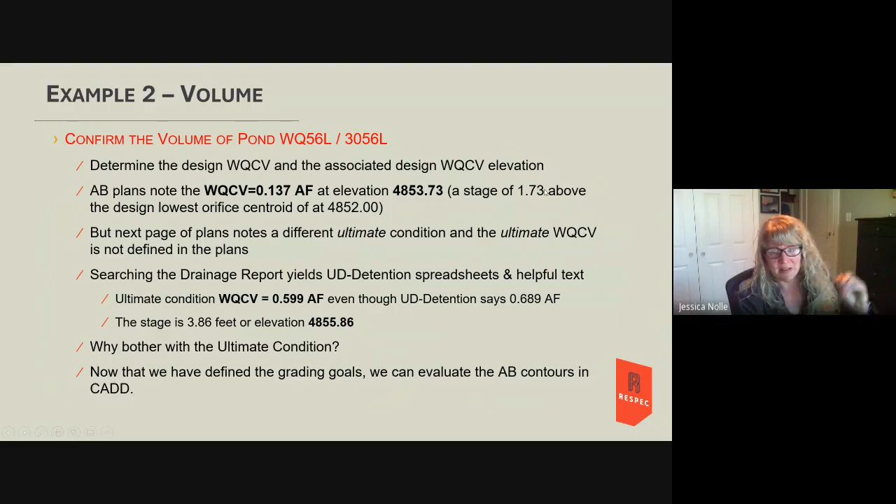So, you know, the relationship of the stage in UD detention doesn't really work with elevations at all. It just talks about stages. So, to look at these stages on both, I think this one said 1.79 and... sorry.

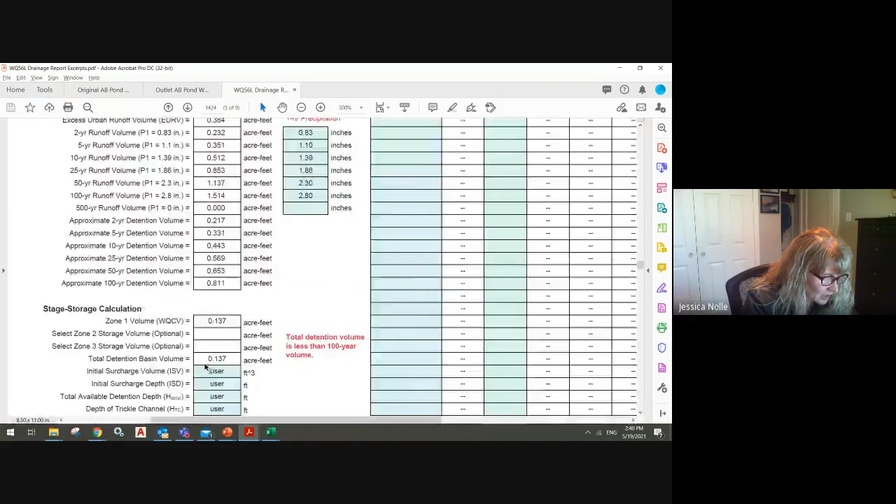No. Maybe, yeah. If this says it's getting... I don't know where the stage is on this. Maybe it's not on this sheet at all. My apologies, sometimes it takes a little bit of back and forth.

In any case, we know what we're looking for: 0.137 acre feet at elevation 53.73. 53.73.

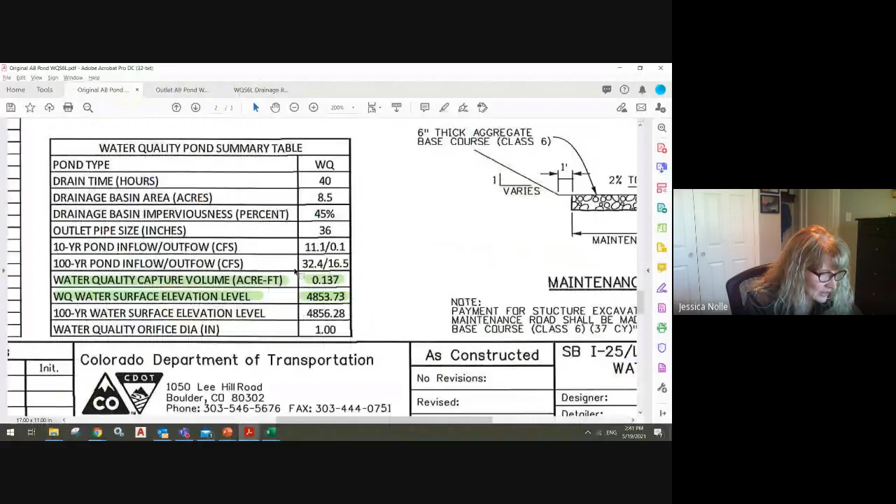And then I wanted to show you the next page of plans, which notes a different ultimate condition, and the ultimate water quality capture volume is not actually in this table. Yeah, so here it just calls it proposed water quality capture volume 53.73. And then here's the ultimate, which is where the grate elevation is set.

So this is kind of the same concept as the EURV, where there's a little room to be flexible in here. As long as the ultimate water quality capture volume is underneath this elevation of 55.6, it might be okay for this to wobble a little bit, to not quite get the elevation. Does everybody kind of get that?

Like, this says proposed water quality capture volume at 53.73. Well, what if it doesn't occur until 53.9? As long as you have the ultimate water quality capture volume under this 55.6 elevation, it's got the same outlet, so it still will function in substantial conformance. So that's just another example of that. And here's the water quality centroid at 52.

All right, and then why bother with the ultimate condition? That was the same thing as why bother with the EURV.

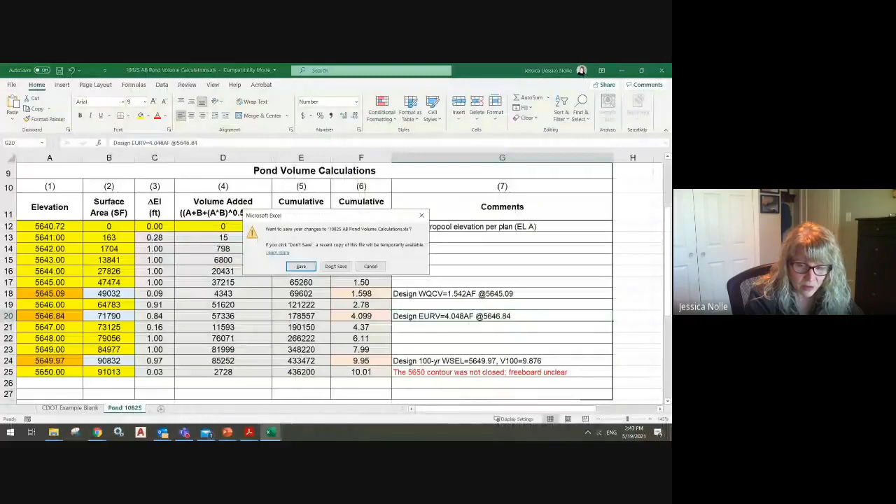I will get to the spreadsheet in a second, but spoiler alert, they didn't meet their volume requirements. And so this was kind of, well, maybe I should go through the spreadsheet really quickly first.

So this pond that we're looking at right now is this as-built that I got. So that was great. I got all these inverts, I got orifice holes are 1 inch in diameter, here's the top of concrete. Plans say 55.6, this is the ultimate condition water quality capture volume elevation. The surveyor says it's dead on. I'm not going to argue with that because this is a separate PDF he sent me.

These are inverts, not centroids, but that's easily calculable enough when it tells me it's 1 inch in diameter. The centroid of the design for the lowest orifice was 52, and the as-built centroid was 52.05.

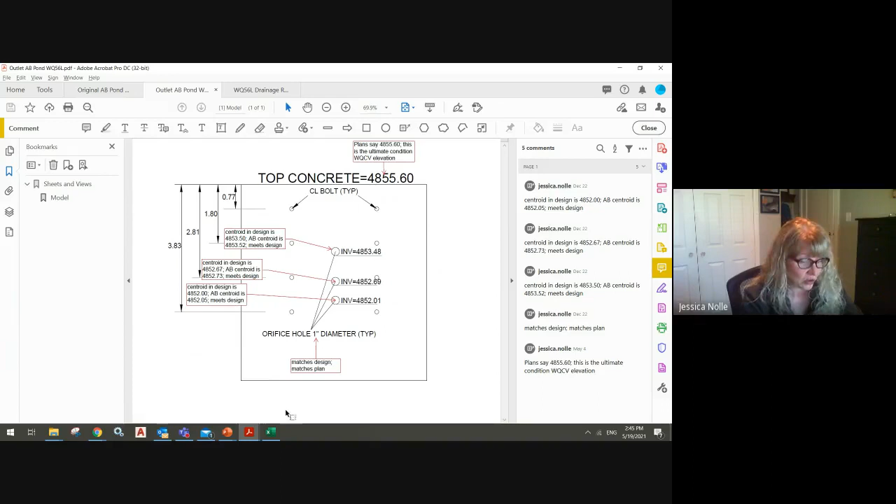It's about as close as you're going to get, but I did want to make the point that to cross all the T's and dot all the I's, I used 52.05 as the starting elevation and not the design elevation of 52. Then I entered all the as-built contour areas, and I stuck in the design water quality capture volume, and I got an interim condition water quality capture volume of only 0.079.

So that was 42% short. That's pretty short. But then, like I was saying, I thought maybe they'll pick that up by the time the elevation gets to the top of the outlet structure, which is 55.6. That volume was 0.523, and the design was 0.599.

So that was only 13% short, but still short. So before I caused a big kerfuffle and said I wasn't going to certify this, you'll notice that in this cell I did use the frustum of the pyramid equation. The CDOT drainage design manual allows me to use average end area. So this tab that says AEE, that means average end area. You'll see we go from minus 13%.

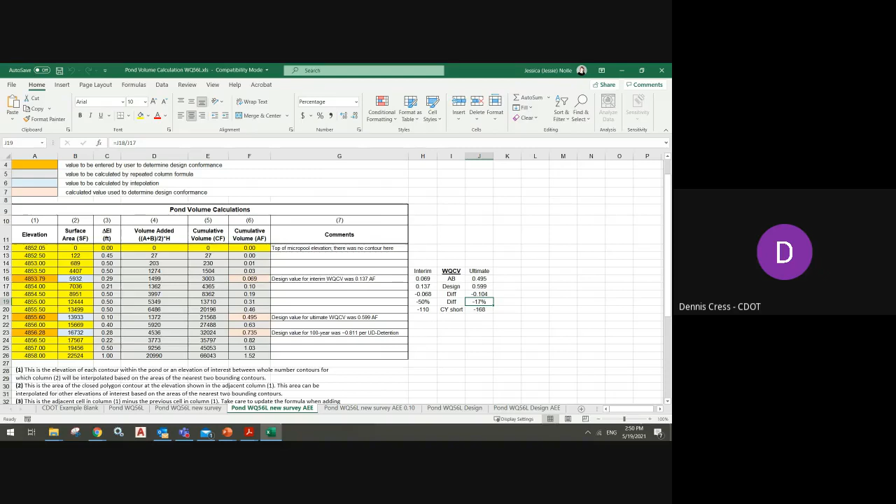Yeah. In the pond world, we use average end area for planar area as well. You can call it— some pond worlds are different than others. My pond world never—and I was confused with the terminology. I'll stand corrected.

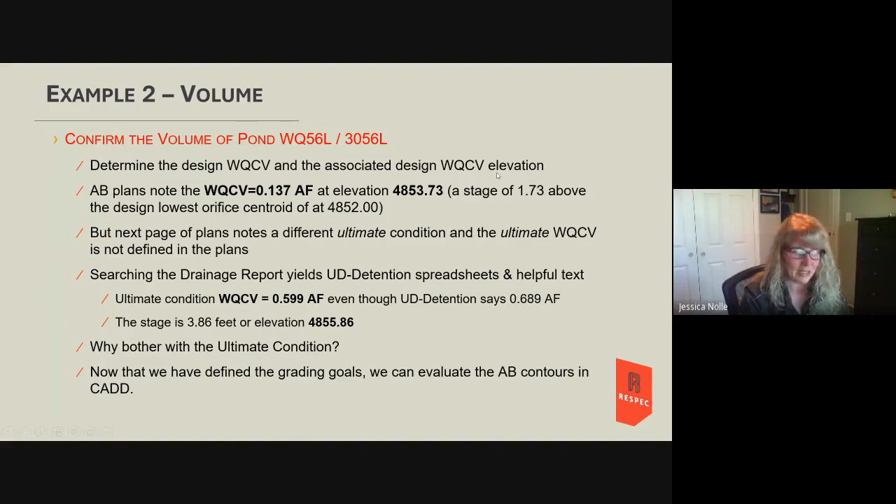So this is what your drainage design manual, Albert, I guess, wrote that, calls it average end area too. So sorry for the confusion. I could see how that would be confusing if you're thinking, what are you doing—cutting a section through the pond? And then how does that have to do with area? But yeah, it's average planar area. But it's the same formula, but yeah, maybe we could communicate that differently. Tell Albert to change that.

In any case, we don't get a huge difference—we go from 18% short to 17% short by changing our formula. A plus B divided by 2, times H.

So what I did, as I mentioned earlier, was all part of trying to get to yes. You'll notice these contours, 54, 54.5, 55. When someone brought up that they're allowed to be off by 1 inch in their grading, I used the same areas as before but dropped all the elevations by a tenth of a foot, since that was suggested to me. That actually gave me more of a difference.

Now I'm only 12% short. But I'm still 12% short on the ultimate condition and 39% short on the interim condition. The interim condition, I really have no issue with. But if the ultimate's still 12% short, that's a problem.

So then, going back to your thought Stuart about how they calculated volume in the design, I went in and measured all the areas of the white contours from the design Muller sent me, put them in my spreadsheet, and still ended up 4% short. So then I used average end area, and got really close, 2%.

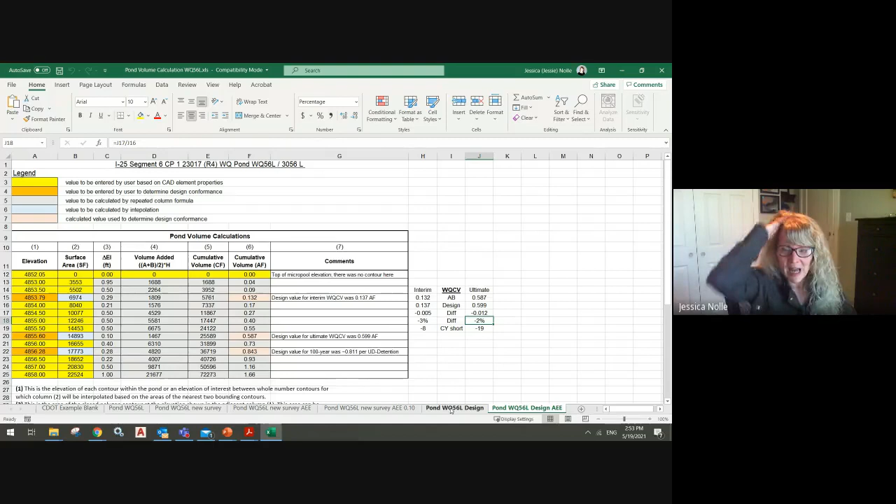Somebody asked in the previous training whether we should over-design the ponds a little, make them bigger than needed to give the contractor some cushion. I have two thoughts on that: sure, why not, you're just going to pay a little more. But my second thought is, of the 8 ponds I've reviewed, 6 of them have been fine, so contractors can do this.

I'd like to touch on how the contractor messed up on this one, because I think that's a point worth repeating. The contractor can build this to design, and if they had built it to the design, it would have been fine.

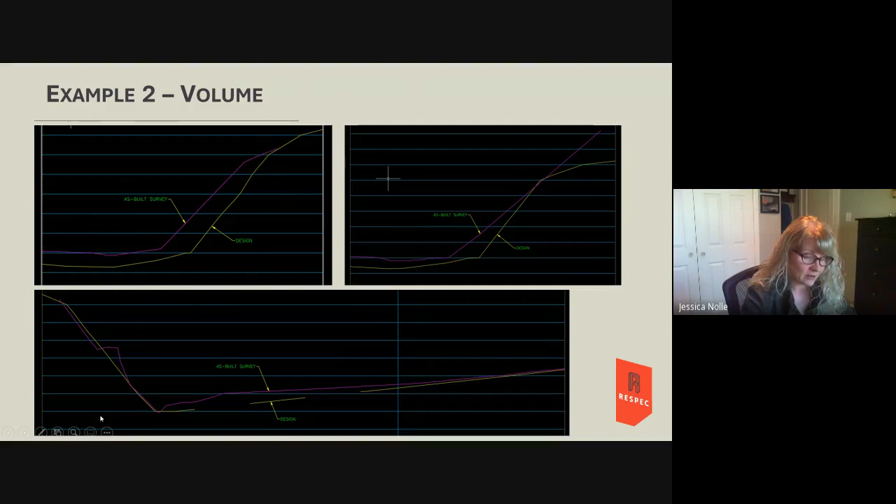But what the contractor did was, coming out of the outlet structure, increase the grade really quickly and then flatten out instead of following the contours. That ended up being enough to be too much for me to be comfortable with at 17%. If you look closely at the contours, you can see they hug in a little in these corners, and that's what made the difference.

Do you think some of these take sediment during construction? So it's probably a good idea to survey them when they're freshly ready? Yep, I think they do, but I don't think they take 168 yards of it.

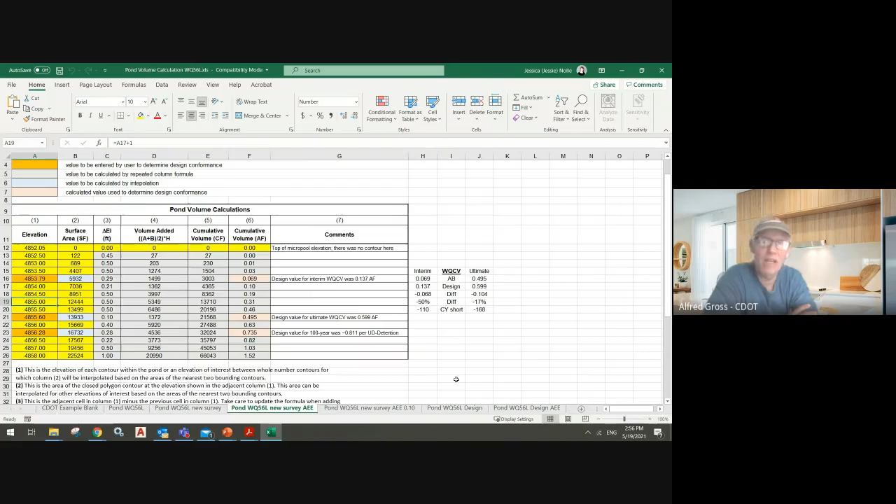Hey Tyler, I think that's a really good point, because one of the Region 4 ponds, if I'm not mistaken Jesse, they let it sit for several months, right? But again, I don't think they take that much. That's a fair point. You want to get this done, you don't want to wait till the contractor's demobed and everything and then go, uh-oh, what are we going to do now. I think that's part of the process CDOT is developing for timing and everything else to get this going.

I have a question about this example. The interim versus the ultimate, were they planning on growing this pond over time? No, not planning on growing the pond, planning on accepting additional development for the pond. So it really needs to meet the interim, right? It can't just meet the ultimate. I don't think so, because the water quality outlet, the plate, let me go to the plan view here.

If the water quality capture volume was, let's say, 1.5 acre feet, and if that occurs up here, it's relatively going to drain in the same amount. It'll be a little different, but not drastically different.

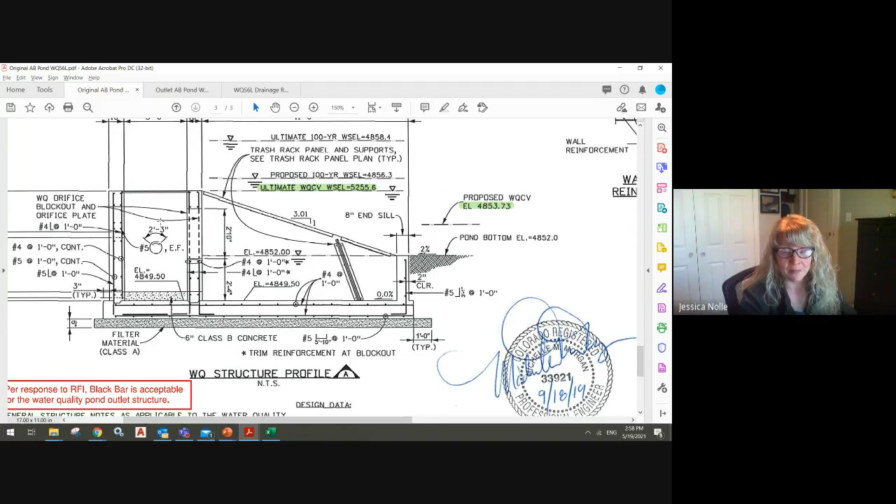And that's the same with the EURV concept. If the water quality capture volume is here, but it's still the same orifice plate, the water just gets a little deeper. It's still not going anywhere, so that's less of an issue. But what you don't want is for water to be leaving the pond too soon.

Maybe I'm still not following, but if we're approving this pond for the interim and also the ultimate condition, when they're adding more impervious area, I don't want it to be out of volume and spilling over, like you're saying, as soon as they add another lane.

I'm concerned. From what I'm understanding, I wouldn't want it to just match 17% off on the ultimate, or 5% off on the ultimate. I would want it to be 5 or 7% off on the interim condition. If you're going to stamp it, that's perfectly fine for you to say that's your level of comfort, and if you want their interim elevation to not be higher than this, then that's what the plan said, so they need to build it like that.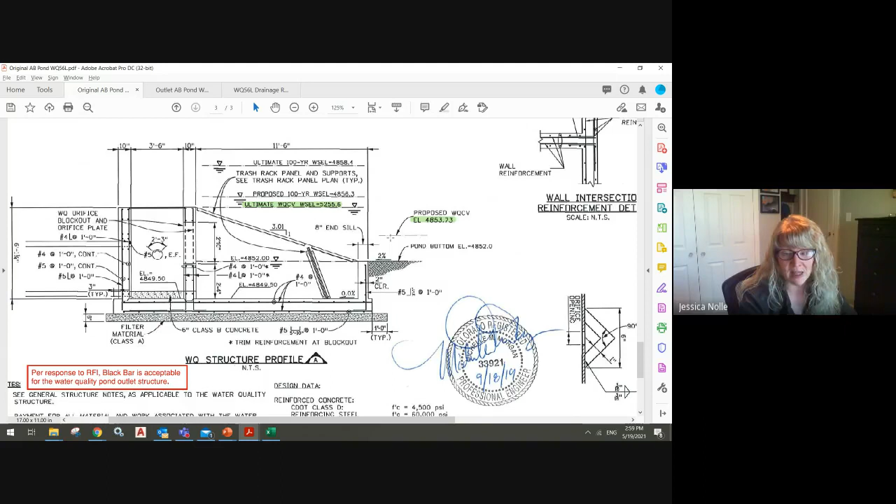Yeah, I'm trying to understand why you're not concerned on that. Because the way water quality is treated in an extended detention basin is through detention time. If the water gets a little higher, let's say 1.5 acre feet is the interim design water quality capture volume, and if that ends up being right about here, it's still not leaving the pond quickly. It still has to go through this orifice plate no matter what, so it's being treated for water quality.

But if we add a bunch of paved area, runoff from that also has to be treated, and if that ends up here, now it's not going to be treated. So if the ultimate water quality capture volume was 2 acre feet, and that was still below this overflow spillway, then I'd be okay with that. But it's probably not going to be with these percentages off.

No, it'll be 13% short, on the best day, because I did the most beneficial calculation. I tried every which way but loose to get within my comfort zone, and 13% just isn't there.

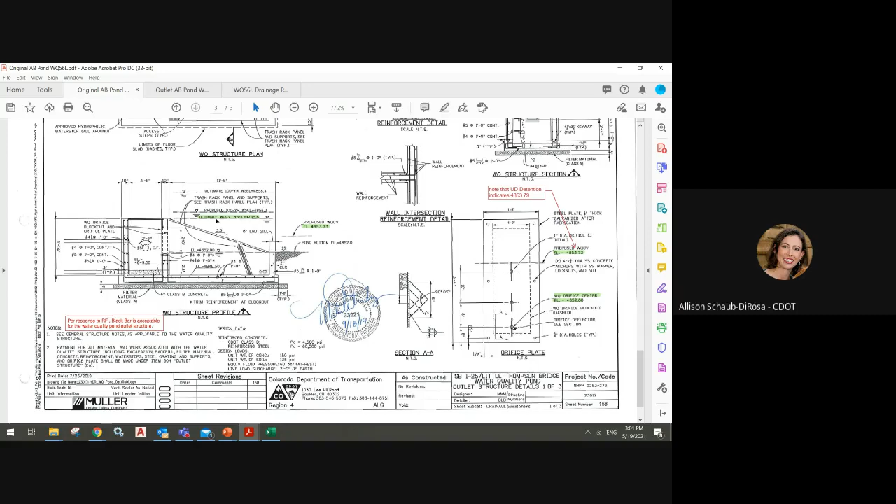So how much time did you spend on this one with the different calculation methods, pulling cross sections and conversations with them to try to resolve it? A lot. I'm doing all this upfront work for you guys, so by the time it's your turn, everybody's going to know what to give you.

Yeah, that we have enough of the same contractors that you think. Yeah, like I said at the beginning of this presentation, the hardest part is getting the information you need. And again, 6 out of my 8 ponds passed with flying colors, so it was really just an hour or two on those. It was this one where it didn't make it right off the bat, so I spent a lot of time trying to figure out what else I could justify.

This one took a lot longer, probably pushing a day between all the coordination and back and forth, and then cutting cross sections to say, no, you are wrong, look at this cross section. And once we sent them the cross sections, I haven't heard anything.

I have talked to them, Jesse. They are fixing it. It's my understanding, talking to the Region 4 hydraulic engineer, they are fixing this. I think they've admitted it was wrong, and they are making the corrections. This kind of thing happens, and I'd put money that this same contractor, next time he has to grade out a pond, he's going to make sure he gets it right.

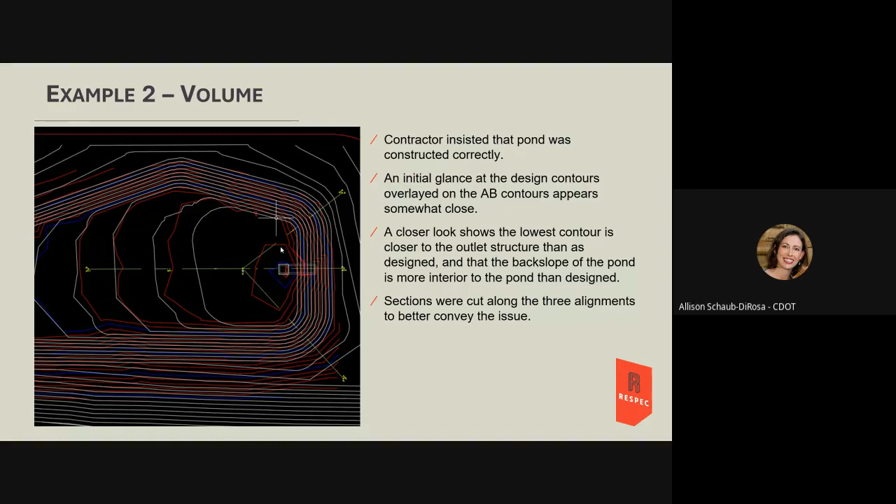Another follow-up question. Do we have concerns when they have to get this additional volume? Will they just excavate an area, not in the center of the pond, not at the trickle channel? So it might be weird ponding somewhere else. I would hope that when they go out there, they're getting it back here where they should. That would be part of the job of whoever the project manager is for construction, to make sure of that. You could tell them, you better make sure it still drains, because I'm going to fail it again if we don't want a big hole in the middle that doesn't drain. That has been part of my conversations though. I did the other pond that was short, and I made suggestions on where they could pick up additional volume. So it's just a collaboration at that point.

Rachel, is your hand up? No, it's not, that was me. That's me, sorry Scott.

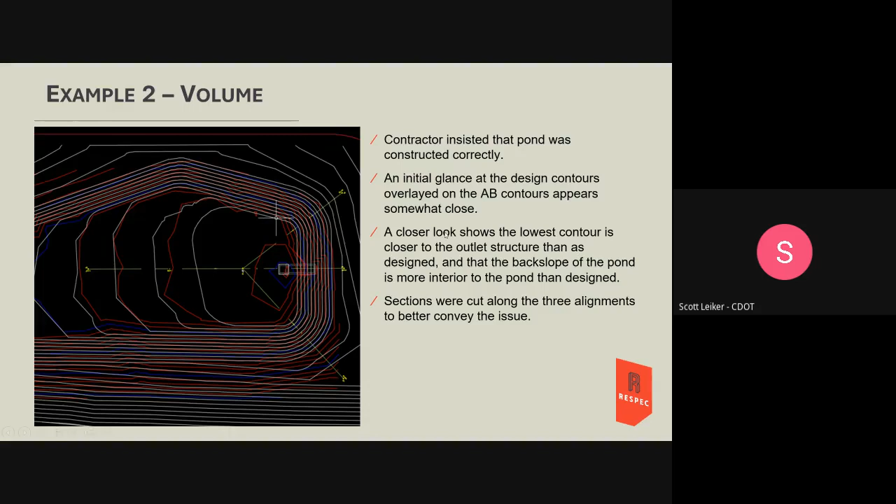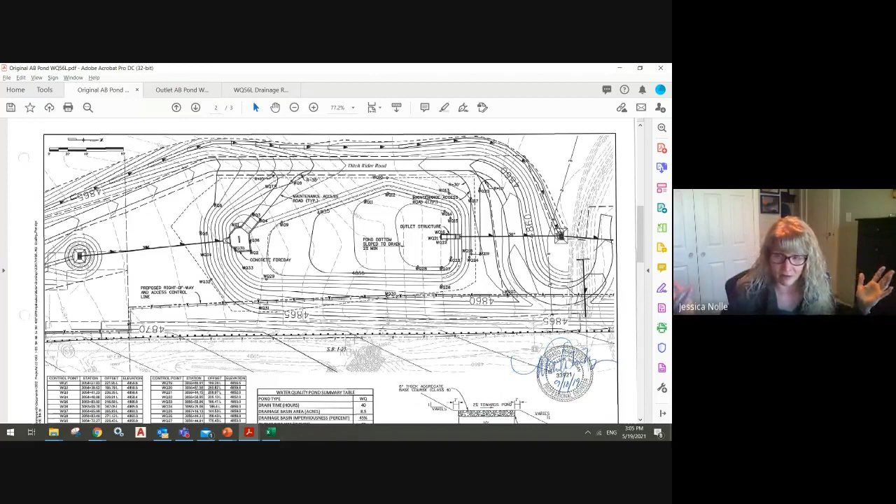Just a question, did you go back and look at the construction plans? Because I have seen some construction plans and there's no data points, you didn't give the contractor enough information to build this properly. Well, here's the plans, and there's a lot of points in there. I agree with you, Scott, about that. Every project I've had in the past 5 years, I have the contractor asking me for my CAD files, because apparently Caterpillar now makes a machine where you just put a thumb drive in and it drives itself. I was just curious, so was this a contractor issue or a design issue where they didn't give them enough information? It looks like it's a contractor issue.

Yeah, I am a stickler for grading control, like how I'm a contractor, where is 0+00? You're not like, how am I supposed to find that? But it seems like anymore they just ask, where are your surfaces? And they give it to the excavator and it magically just runs itself. No excuse, I still think if I'm going to stamp drawings, I can get there on my own.

Okay, we've got half an hour, so are we almost done?

Almost. So takeaways so far: you need a detailed as-built survey of the outlet, and that will also help you regarding volume. That will help you define what elevation is the bottom of your water quality capture volume and what is the elevation of the top of your water quality capture volume. For the most part, that's the centroid of the lowest orifice and the spillway. Now if you have an ultimate condition or EURV or something, we talked about how that's a little bit different.

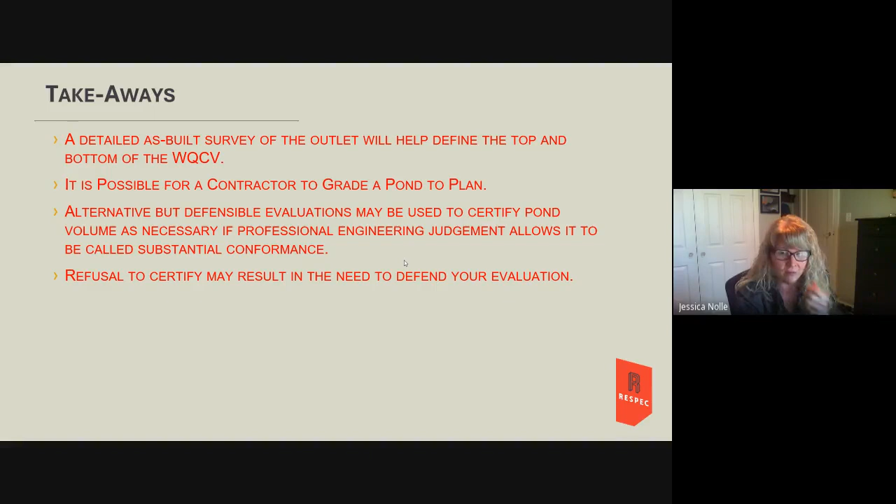All right, outlet conformance. UD detention is the most common. Familiarize yourself with UD detention. The Mile High Flood District, I believe, has a video. Jesse, I put the link to the video in the chat. So access that. Great.

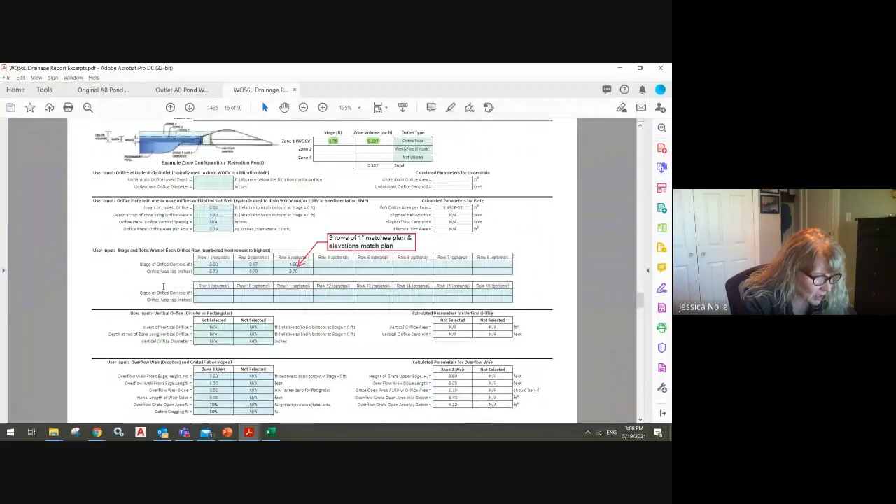The spreadsheet gives drain times for various setups, let me see if I can call one up here. So this is an example of, you can put, what is the stage? The stage of 0 is the bottom, the top of the micro pool, the top of the permanent pool. That's the centroid of the lowest orifice. And then these are elevations above that.

And then your square inches areas. You can put squares in here. You can put whatever areas you want to. But then it gives you time to drain 97% of the inflow volume, time to drain 99% of the inflow volume. So depending on the orifices you put in, you can mess with this and you can get different drain times, which is ultimately how we do it.

Yeah, that's all I have to say about that. Oops, sorry.

It does require a stage storage curve to be entered to reflect the proposed pond grading. So when you design an outlet using UD detention, you say stage 0, my surface area of my pond is X. Stage 1, my area is this. And you do that by grading it out and then measuring your contours for area as you go.

And then this is, if desired, check to ensure the construction plans reflect the UD detention for orifice elevation and size, weir elevation and length, water quality capture volume elevation, and EURV and 100-year as applicable. And then check to ensure the as-built reflect the construction plans. I mean, that's more important than going from the design plans to the drainage report.

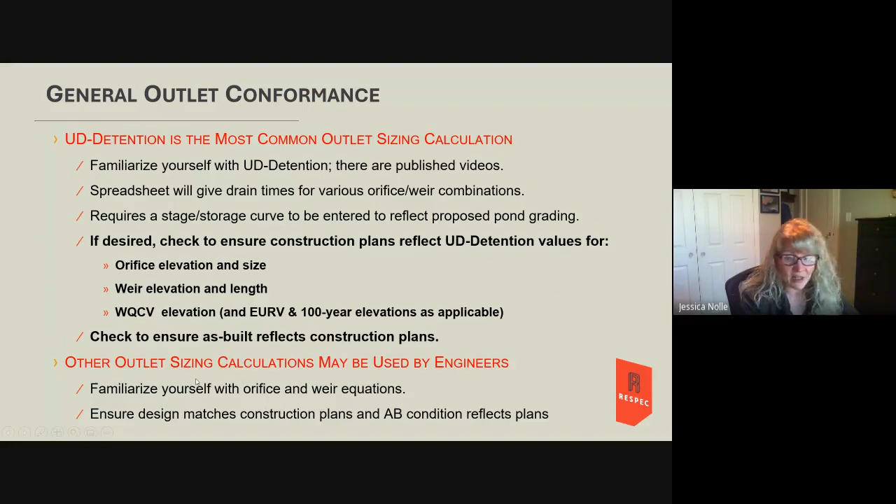But I did want to say that other outlet sizing calculations may be used. I'm still a fan of that. So you can Google orifice and weir equations if you don't remember them. But you always want to make sure that the design, the construction plans, and the as-built conditions are all more or less the same, if not exactly the same.

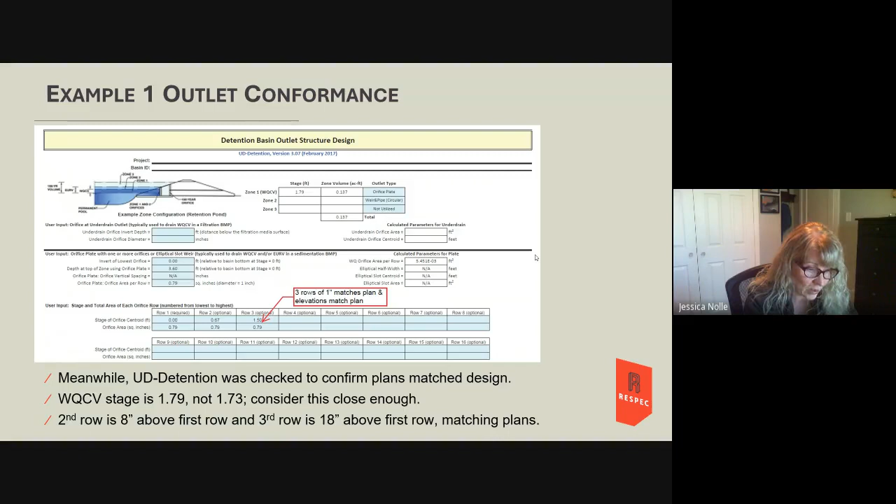And I did note in the meantime, this is when I went into the UD detention, I thought, well, at least these are 1-inch diameter and they're, what's the spacing? And the spacing in the UD detention did match this. So that was something that I could check.

I think for the most part, unless they're more than 1 inch off, it's probably fine. Like I said, we don't want it on upside down. So that, gosh, this invert was at 52 and it was supposed to be at 56 or 51. It's just stuff like that. But that's going to be one of those things that you have to use your judgment with too.

Finally, certification or not, that is at the discretion of the professional engineer. There's a reason a specific tolerance isn't specified. I gravitate towards 5, but I'd also be okay with 7.

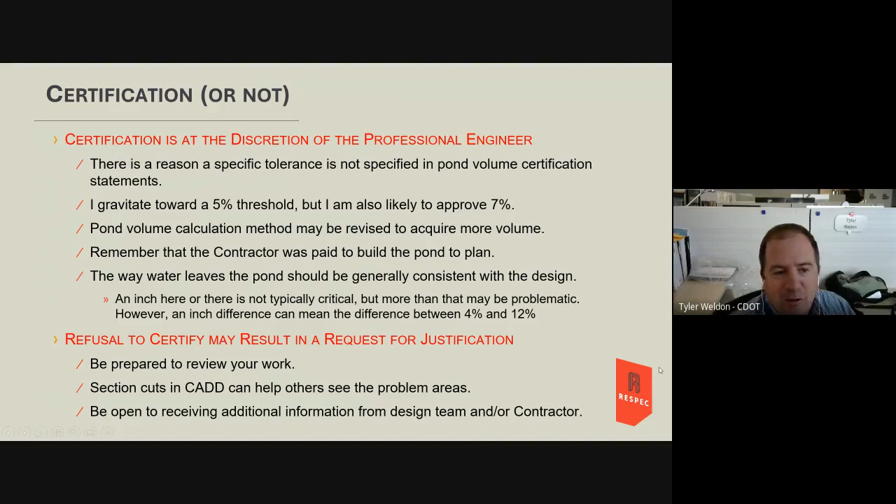I mean, we have a form, Tyler. We have a certification form. Oh yeah, that form. The language, to me, it's a lot, it's very verbose. I don't think it needs to be that verbose, but some people like to add words.

We're still working on it, Jesse. It basically just needs to say that the pond volume and the way water leaves the pond is in substantial conformance with the plans. And there are some elevation entries.

After I reviewed a certification that I got, I realized that's not really how it should look. So that's in flux. My response thus far has been to email Rachel and Al and say I can't certify this. I did a brief memo about why, and said these 6 ponds are fine. But I haven't had to stamp anything yet. Ultimately, I think it is going to be a stamp.

Any other questions or comments? Jeremiah, I know you have an update about some training as well. You're welcome to provide that.

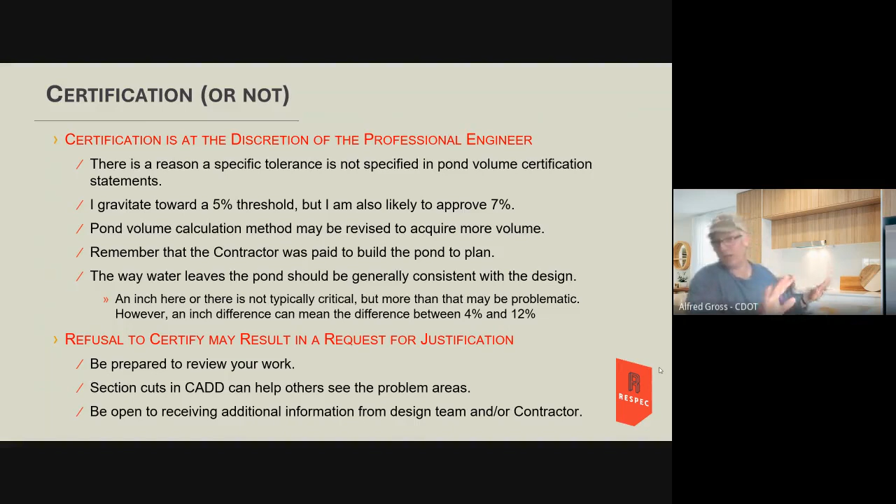My hesitation with putting a pretty decent limit on it is that then I'm getting pushback if I say no. 9.5% is not close enough, right, and so now it's like, no, and then I got to fight. I don't want to fight.

Does anybody else in the meeting have a comment about tolerances? Thank you, Rachel. I'll just throw my 2 cents in, and I don't want to speak for you, but from the auditor standpoint, I think once you get to that 5 to 7% realm, that's all we're going to be looking for. Rachel and I are looking for that rationale behind why it is certified at 7%.

Maybe it's a 5 acre foot pond versus the quarter acre foot pond that's in the next basin over. So I think those are all things that go into your PE stamp and your engineering rationale of, yeah, this is okay and I'm okay with it, or no, this isn't. That's what Rachel and I will be looking for, that you did that rationale behind why it's not good enough, or why it is. And I would say I will back any CDOT hydraulic engineer all the time if you're not comfortable with that, and we would go to bat with you.

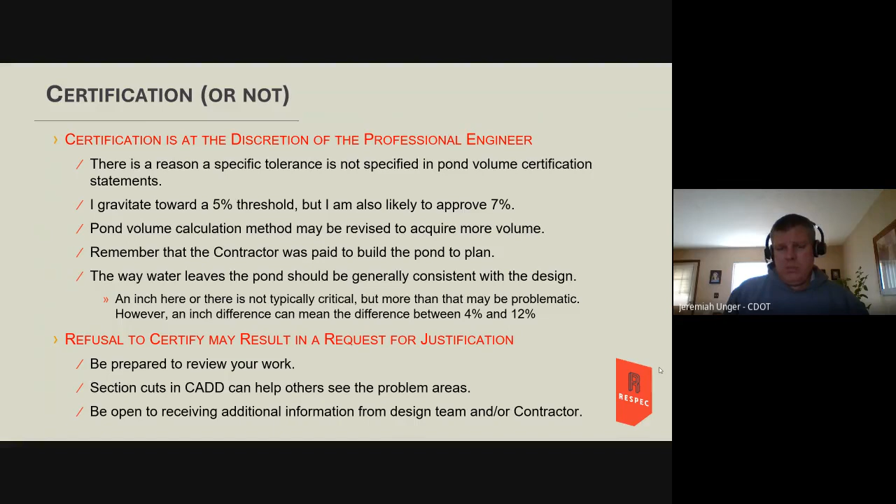I mentioned in the chat box a little while ago that I'm going to investigate using some mitigation pool fund money to protect us in the gap, so that whether it's a CDOT region hydraulic engineer or a consultant completing this pond certification form, we have an opportunity to connect with an on-call consulting hydraulic engineer. We realize this is going to take some practice, and it would be nice to have some support in that way. So I will review that possibility and be in touch with the mitigation pool committee to let you know their thoughts.